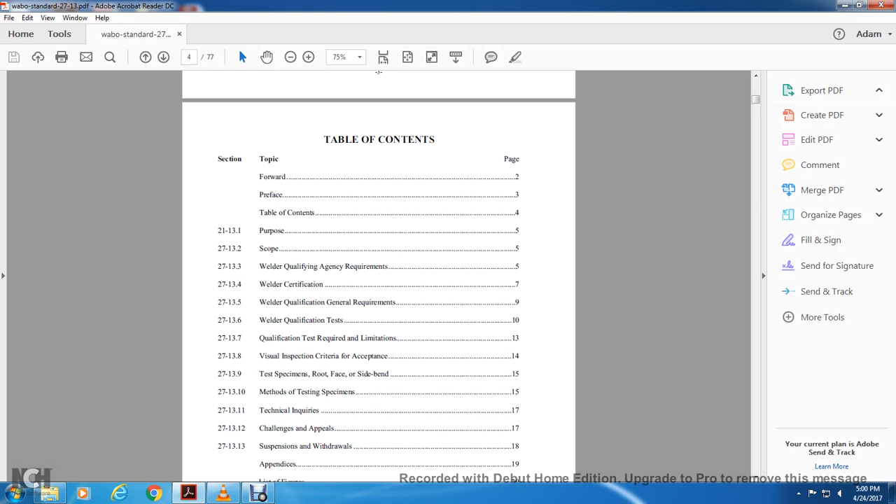Table of contents: forward, preface, table of contents, purpose, scope, qualifying agency requirements, welder certification, welder qualification requirements, welding qualification test required, limitation, visual inspection criteria for acceptance, test specimen (root, face, side bend), methods of testing specimens, technical inquiries, challenges, appeals, suspension, withdrawals, appendices, list of figures, table of terms and definitions, sample welding procedure specification.

The purpose of the standard is to provide greater confidence for the design professional and owner and building officials that welders, welding operators, and tackers are qualified to perform work which they have been certified for in building construction. Certification of personnel in accordance with the standard is intended to promote the overall welding quality assurance program.

Other components of the welding quality assurance may include but are not limited to the following: approved construction documentation, contractor quality control, approved welding procedure, welding qualification not covered by the standard, material testing, building department inspection, special inspection, structural observation. Qualifying tests described in the standard are not intended to be used as a guide for welding during actual construction.

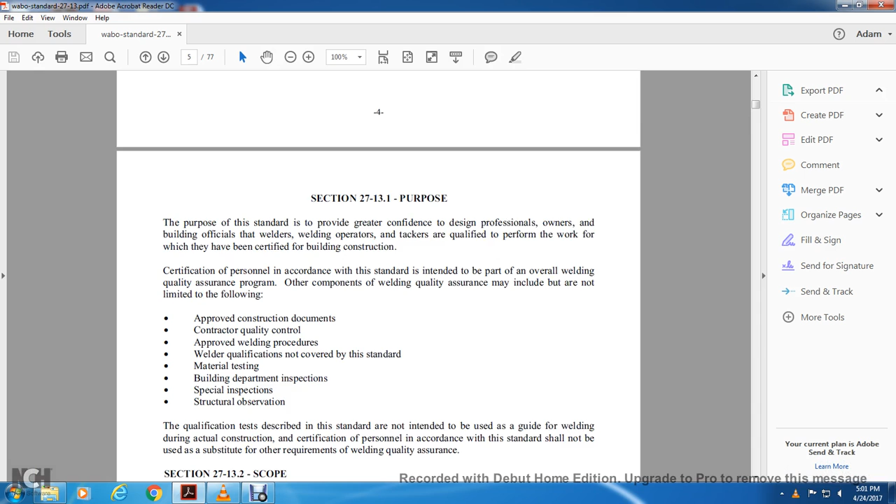This provision of the standard shall apply to the qualification and certification of welders, welding operators, and tackers performing structural steel, sheet steel, and reinforcing steel welding. These limitations of the welder operator qualifications are found in Table 2713-1.

Section 2713.3, Welder Qualifying Agency Requirements, General. The WABO-approved welder qualifying agencies are authorized to perform the welding operator performance qualification tests required by the standard as a WABO-approved facility. Welder qualification agencies interested in becoming certified by WABO to perform the test may obtain application forms and information concerning certification by contacting the WABO office or visiting the WABO website, wabo.org.

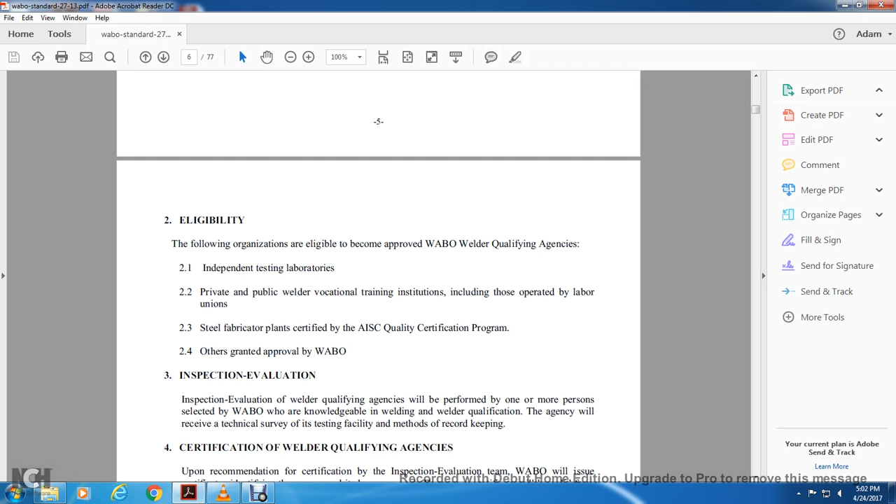Eligibility: the following organizations are eligible to become WABO welder qualifying agencies: independent testing laboratories, private and public welder vocational training institutions including those operated by labor unions, steel fabricator plants certified with the AISC quality certification programs, and other groups approved by WABO, Washington Association Building Officials.

Inspection evaluation of the welder qualification agency will be performed by one or more persons selected at WABO who are knowledgeable in welder qualifications. These agencies require a technical survey and testing facility review of the method and the required record keeping.

Certification of welder qualifying agency: upon recommendation of the certification inspection evaluation team, WABO is issued a certificate identifying the agency and key personnel. The agency certificate will be valid for a 3-year period, subject to periodic reinspection of the agency.

Agency personnel witnessing the test and proving the mechanical and visual testing of coupons must be WABO certified welding examiners.

The agency personnel can meet the WABO certified welding examiner requirement by submitting proof that they are an AWS (American Welding Society) certified welding inspector, qualified and certified in accordance with the provision of the American Welding Society QC1 standard for qualification and certification of welding inspectors, or by successfully completing the WABO written welder exam and a test based on the competence of the standard. Personnel performing radiographic testing will be qualified in accordance with the current edition of the American Society for Nondestructive Testing recommended practice number

SNT-TC-1A. Only individuals qualified as NDT nondestructive testing level 2 may perform and interpret radiographic testing.

Welders and welder operators must be certified by WABO in one or more of the following categories upon satisfactory completion of applicable qualification testing described in the standard. Structural welder processes include shielded metal arc welding (SMAW) manual, gas tungsten arc welding (GTAW) manual, gas metal arc welding (GMAW) semi-automatic, and flux core arc welding (FCAW) semi-automatic.

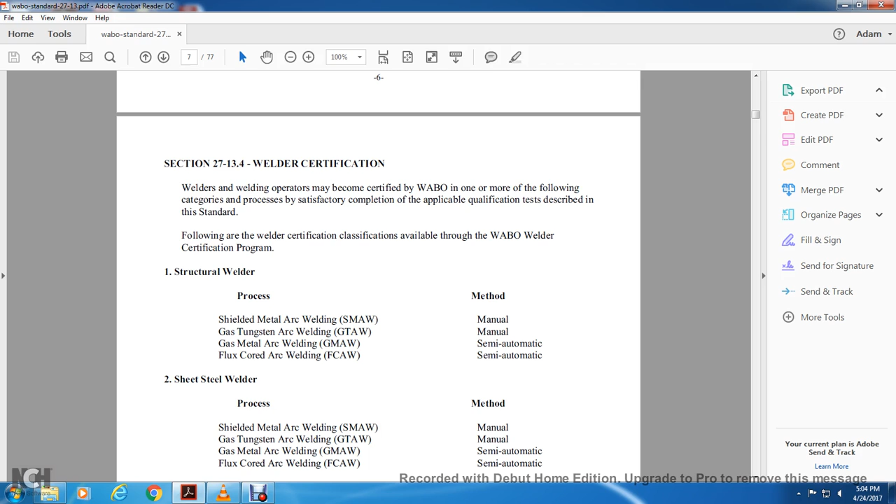Sheet steel welder process includes shielded metal arc welding (SMAW) manual, gas tungsten arc welding manual, gas metal arc welding (GMAW) semi-automatic, and flux core arc welding semi-automatic.

Welder operator process includes submerged arc welding (SAW) automatic. Reinforcing steel welder process includes shielded metal arc welding (SMAW) manual, gas metal arc welding semi-automatic, and flux core arc welding semi-automatic.

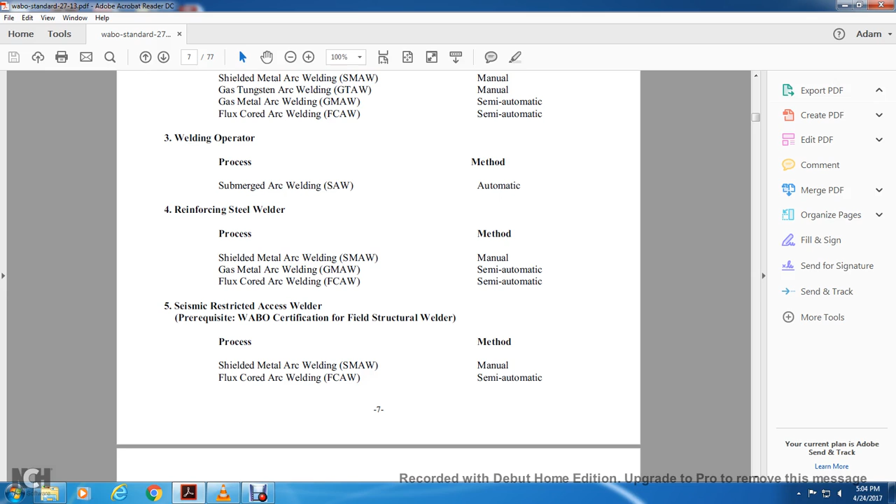Seismic restricted access welder prerequisites require WABO certification for field structural welder process: shielded metal arc welding (SMAW) manual method, and flux core arc welding (FCAW) semi-automatic.

Welder certificates are issued for a period of one year. For the certification to remain valid, the welder must have the certificate endorsed by his or her supervisor, designee, or a WABO certified welding examiner. The endorser shall witness the individual welding during the calendar quarter of being endorsed.

To renew the certificate, the welder must return the certification card properly endorsed with a signature from WABO and pay the renewal fee. The qualification of the welder or welder operator shall remain in effect indefinitely unless the welder is not engaged in the welding process for which he or she is qualified for the preceding 6 months, in which case new certification testing shall be required.

Per 6.3.2, if there is some specific reason for questioning the welder operator's ability, new qualification testing may be required. In the event the welder operator fails to pass the new qualification test, certification shall be suspended until he or she can successfully complete the welding test.

Per 6.3.3, if the welder fails to renew his or her certification on or before the expiration date, as an exception, the expired certification may be reinstated within 60 days after the expiration date. Thereafter, new qualification testing shall be required.

Certification for seismic restricted access welders should remain valid for 36 months, provided the continuity requirements of the process outlined above are met. After 36 months, a new qualification test is required.

Section 6.4, Welder certification revocation. Each certification card carries a statement that the card is the property of WABO, which entitles all possessional rights to WABO, thereby extending the authority beyond the officers, executive board and program managers to a representative acting on behalf of the WABO.

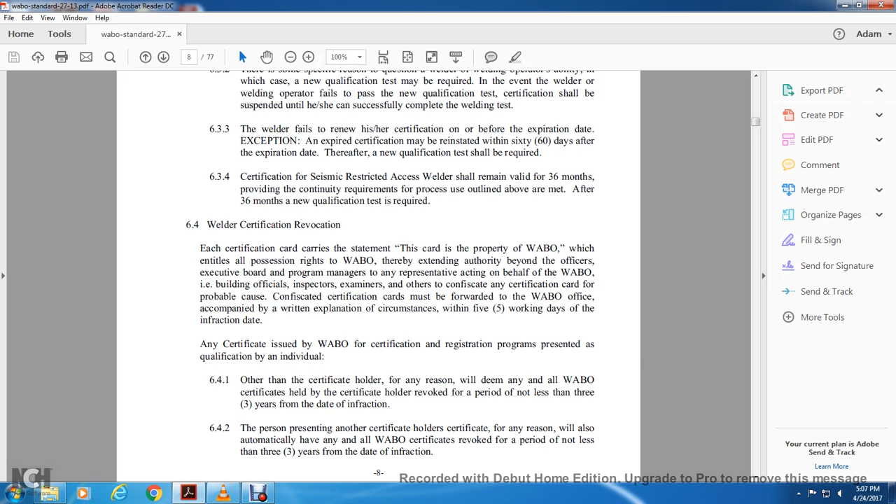Any certification issued by the Washington Association of Building Officials for the certification registration program presented with the qualification of an individual other than the certificate holder, for any reason, will deem any and all WABO certificates held by the certificate holder revoked for a period of not less than 3 years from the date of infraction.

The person presenting another's certificate for any reason will also automatically have any and all WABO certifications revoked for a period of not less than 3 years from the date of infraction.

If the person presenting another individual's certificate is not currently certified with WABO, that person will be prohibited from obtaining WABO certification for a period of not less than 3 years from the date of infraction. Altered certificates, other than approved versions currently on file with WABO, carry the same 3-year revocation provisions.

Section 2713.5, Welder qualification general requirements: knowledge and ability to work performance. Each of the welder operators should perform one or more test welds on prepared test coupons in accordance with the following.

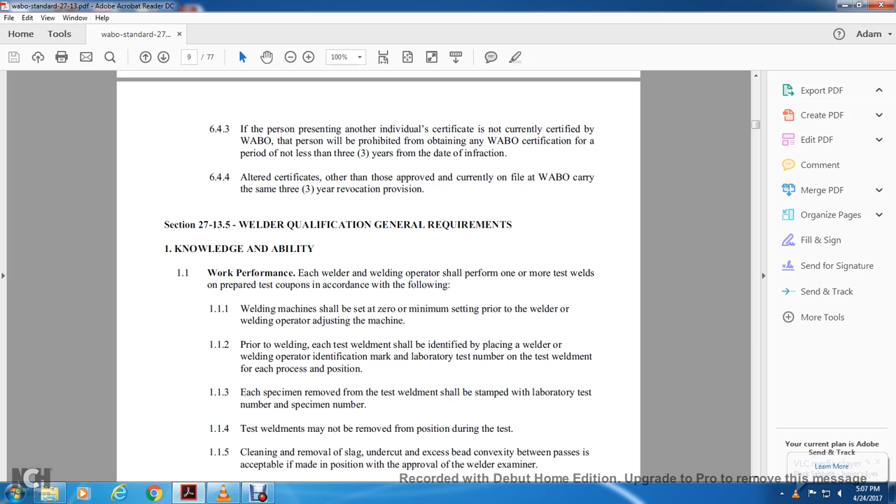The welding machine shall be set at zero minimum setting prior to the welder operator adjusting the machine. Prior to welding, each test weldment shall be identified by placing the welder operator identification marker and laboratory test number on the test weldment for each process position.

Each specimen removed from the test weldment should be stamped with the laboratory test number and the specimen number. Test weldments may not be removed from position during the test.

Cleaning and removing slag, undercut and excess bead convexity between passes is acceptable if made in position with approval of the welder examiner. Grinding off the root and cover pass is not permitted.

Records. A complete record should be made with the tests performed with each welder and welder operator, with the results of those tests. Original copies should be forwarded by the welder examiner to the Wabo office within 30 days together with the application filing fee.

A copy of each record shall be kept by the welder examiner, at the qualifying agency, for a period of 3 years. Bend test specimens and radiographic specimens shall be retained by the welder examiner, the qualifying agency, for a period of 6 months.

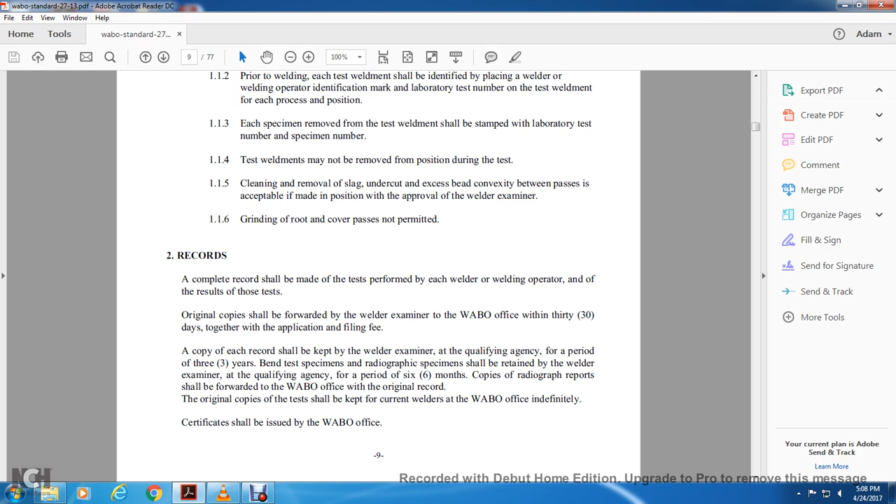Copies of radiograph reports shall be forwarded to the Wabo office. The original record and original copies of the test shall be kept with the current welders at the Wabo office indefinitely. Certificates shall be issued by the Wabo office.

A roster of current certified welding operators should be kept at the Wabo office. Records and specimens are available to those authorized by the Wabo to examine them. Bend specimens shall be maintained securely fastened together with identification stamping clearly visible.

Section 27-13.6, Welder Qualification Test. Qualification test for the structural welder. Welder qualification test for manual or semi-automatic welding shall be one of the following: groove weld test by plate, unlimited thickness; groove weld test by butt joints on pipe and square and rectangular tubing, unlimited thickness; groove weld test for T, K, and Y connections for pipe and tubing, unlimited thickness.

2. Qualification for testing sheet steel welder, see figure 27-13.09.7. The welder qualification test for sheet steel welding shall be the fillet weld T-joint test, sheet to supporting member.

3. Qualification testing for the welding operator, see figure 27-13.09.8. The welding operator qualification test shall be a groove weld test on plate.

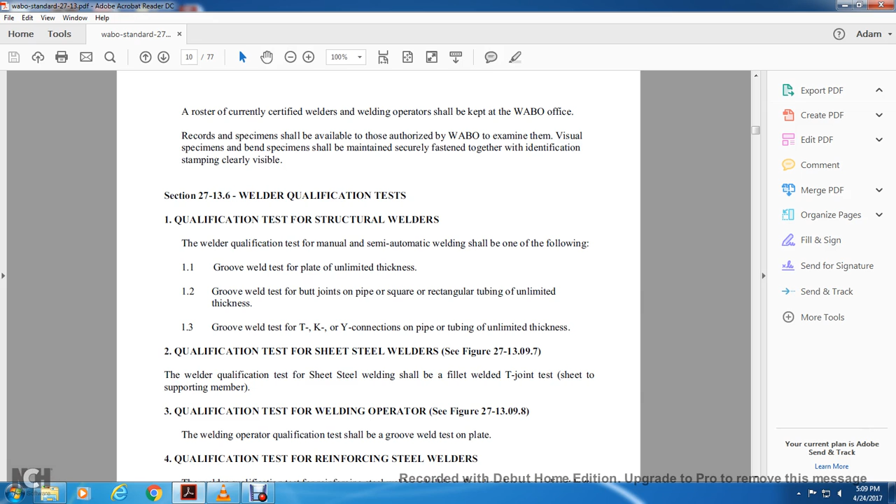4. The qualification testing for reinforcement steel welders. The welder qualification test for reinforcing steel welders shall be a flare bevel groove, indirect butt joint.

This is used to qualify welders for non-steel backing, used to open the root where groove welds are used. Test plate configuration dimensions shall be shown in figure 2713.14.1, figure 2713.14.2, and figure 2713.14.3 as applicable.

5.3 Test plate fabrication general requirements. Test plate assembly: the parts of the test plate assembly may be cut and tack welded together by any individual other than the welder performing the qualification test, except that the welder being qualified should attach the required welding tabs.

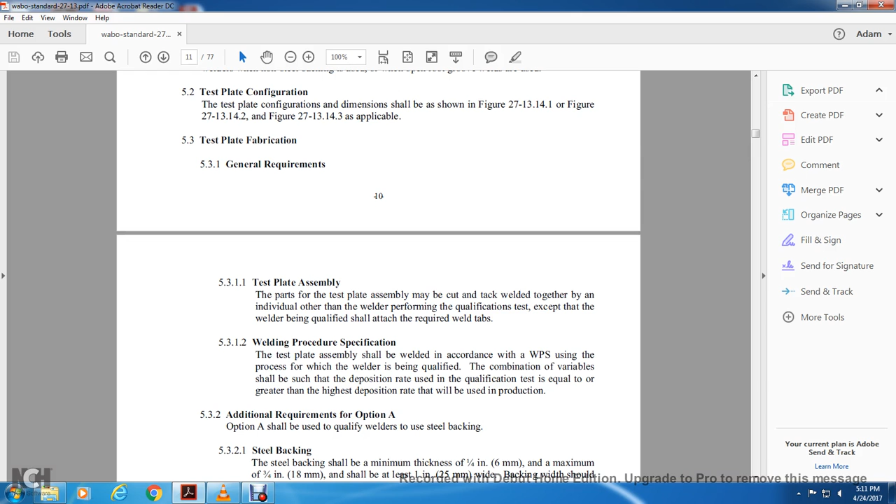Welding procedure specification. The test plate assembly shall be welded in accordance with the WPS using the process the welder is being qualified for. Combination variables shall be such that the deposition rate for the qualification test is equal to or greater than the highest deposition rate that will be used in production.

5.3.2 Additional requirements for Option A. Option A shall be used for qualifying welders who use steel backing. Steel backing shall have a minimum thickness of 1/4 inch (6 millimeters) and a maximum of 3/4 inch (18 millimeters), and shall be at least 1 inch wide.

Backing width should be 3 inches wide, but radiography should be used to evaluate the weld. Backing should be attached to the test plate assembly with tack welds.

Groove weld detail: the groove weld detail shown shall be 3/8 of an inch (10 millimeters) root opening, plus or minus 1/16 of an inch (1.5 millimeters). The included angle shall be 30 degrees, plus or minus 5 degrees.

Option A limitation: a welder qualified in accordance with Option A shall be permitted to weld any joint using steel backing. Separate qualification shall be required if the type of backing is changed, e.g. changing from ceramic to steel backing, or to open root joints, etc.

5.3.4 Additional requirements for Option B. Option B shall be used for qualifying welders for the use of backing other than steel, including ceramic, copper backing, or open root welding.

5.3.5 Backing removal. After the groove weld has been completed, non-steel backing, if used, shall be removed by the welder being qualified.

Back gouging and back welding removal shall be done in the overhead position. The root of the weld shall be back gouged to solid metal. The back gouged cavity shall be back welded.

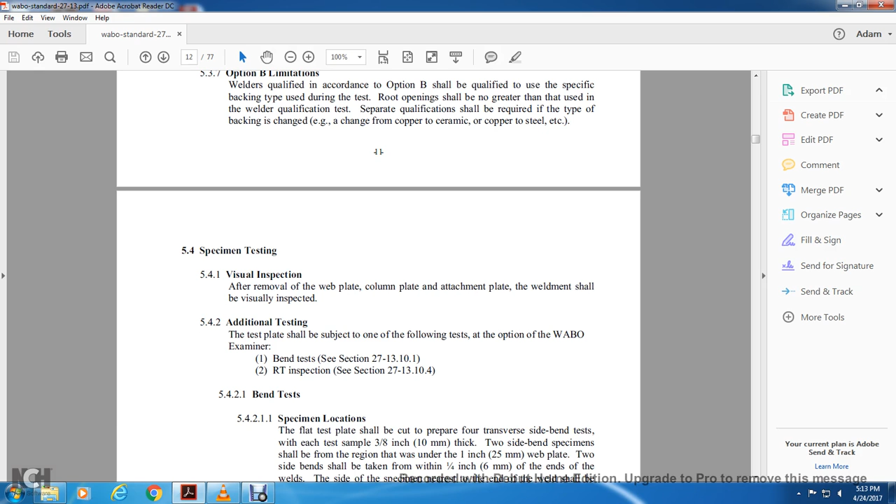Alright, 5-4, specimen testing. Visual inspection: after removal of the web plate, column plate, attachment plate of the weldment shall be visually inspected. Additional testing: test plate should be subject to one of the following tests, optional with the WABO examiner. Bending test, see Section 2713.10.1, or RT inspection, Section 2713.10.4.

Bending test. Specimen location. The flat test shall be cut and prepared with the 4 transverse side bend testing, with each test sample 3/8 inch thickness, 2 side bend specimens, which shall be from the region under the 1 inch web plate. 2 side bend plates shall be taken from within 1/4 inch of the end of the weld. The side of the specimen near the end of the weld shall be clearly marked.

5-4-2-1-2 specimen testing procedure. For 2 specimens taken at the end of the weld, specimen shall be bent so that the side of the bending specimen that was nearest the end of the weld becomes the convex side of the bending specimen, sees the greatest tension.

Retest. In case the welder or welding operator fails to meet the requirements for one or more test welds, a retest may be allowed under the following conditions. Immediate retest within 7 days of the notification of failure. Retest should consist of 2 welds of each type and each position which the welder or welding operator failed. Subsequent retest may be provided when the welder operator submits documented proof of 8 hours minimum further training practice, in which case a single retest weld of each type and position failed shall be made.

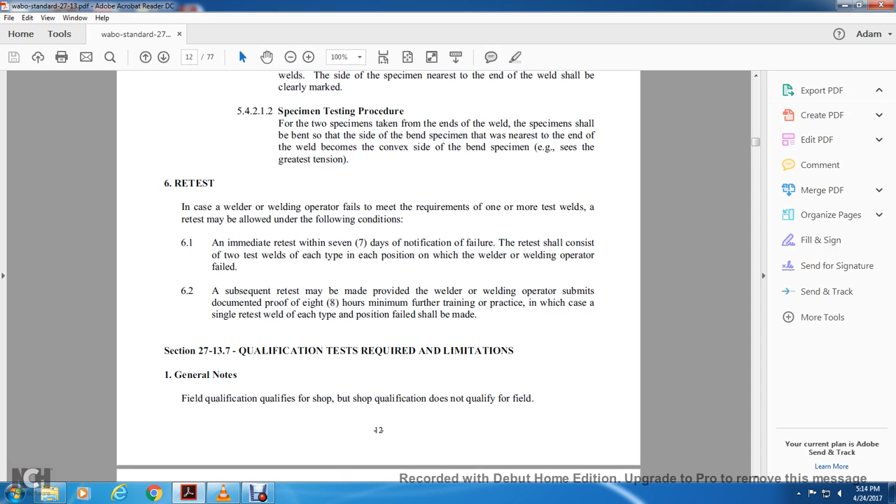Section 2317, 2713.7, qualification testing required limitations, general notes. Field qualification qualifies for shop; shop qualification does not qualify for the field. Qualified thickness, range, position are shown in Table 2713A through H. Limitation of these certifications are shown in Table 2713-1. Welder qualification operators with an approved electrode shielding medium combination shall be considered qualified to weld with any other approved electrode shielding medium combination of the process used in the procedure qualification testing.

For structural reinforced steel qualification, vertical position welding shall be upwards for each of the welding processes SMAW, GMAW, flux core arc welding, gas tungsten arc welding, and submerged arc welding. For the certifications, the required test plates for the pipe shall be welded in the structural steels listed in Table 2713J using electrode, position, plate or pipe thickness, Table 2713A through E.

For sheet steel welder qualification, T-weld plates will be welded using one of the sheet steels listed in Table 2713K using electrode position shown in Table 2713F and 2713G. Sheet steel qualification has qualified the welder for both galvanized and uncoated steel. For reinforcement steel welder qualification, number 4 ASTM A706 bars shall be welded in any of the following structures listed in Table 2713J. Electrodes in the position shown in Table 2713H for the 2 test assemblies are required.

The welder shall be certified in the welding process method of the qualifying test only: shielded metal arc welding, gas metal arc welding, gas tungsten arc welding, flux core arc welding, submerged arc welding. Certification for all others, including short circuiting, short arc gas metal arc welding, is not covered by the standard. The welder shall be qualified with filler metal of the same designation or lower strength than used in the test, of the F4 group for the submerged arc welding and shielded metal arc welding process. See Table 2713L.

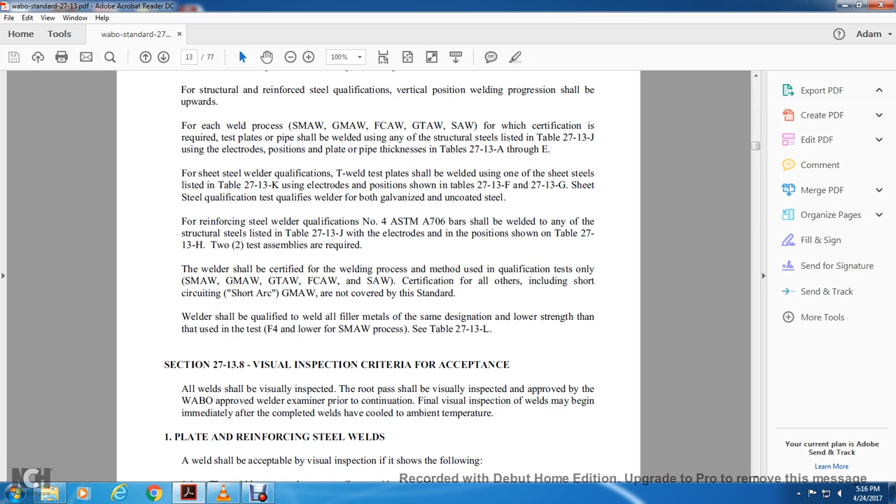Alright, Section 27-13.8, the visual inspection criteria and acceptance. All welds shall be visually inspected. The root pass shall be visually inspected and approved by the WABO approved welder examiner prior to continuation. Final visual inspection of welds may begin immediately after the completed welds have cooled to ambient temperature.

1. Plate and reinforcing steel welds. The weld shall be acceptable by visual inspection showing the following. The welds have no cracks or arc strikes outside of the welded area. Fusion exists between adjacent layers of weld metal and between the weld metal and the base metal. All craters are filled to the full cross-section of the weld. The weld profiles are in accordance with Section 27-13.8.4. Undercut is no more than 1/32 of an inch deep nor exceeds 10% of the test weld length. The piping porosity does not exceed 1 pore. Welds are terminated at the end of the joint in a manner that will ensure sound welds.

Piping and tubing. All pipe welds shall be accepted by visual inspection showing the following. The weld has no cracks or arc strikes outside of the welded area. All craters are filled to the full cross section of the weld. The face of the weld is at least flush with the outside surface of the pipe. The weld merges smoothly with the base metal; undercut shall not exceed 1/32 of an inch.

Weld reinforcement shall not exceed the following. Pipe wall thickness less than 3/8 of an inch, reinforcement 3/32 of an inch. Pipe wall thickness 3/8 of an inch to 3/4 of an inch, reinforcement maximum 1/8 of an inch; over 3/4 of an inch, 3/16 of an inch.

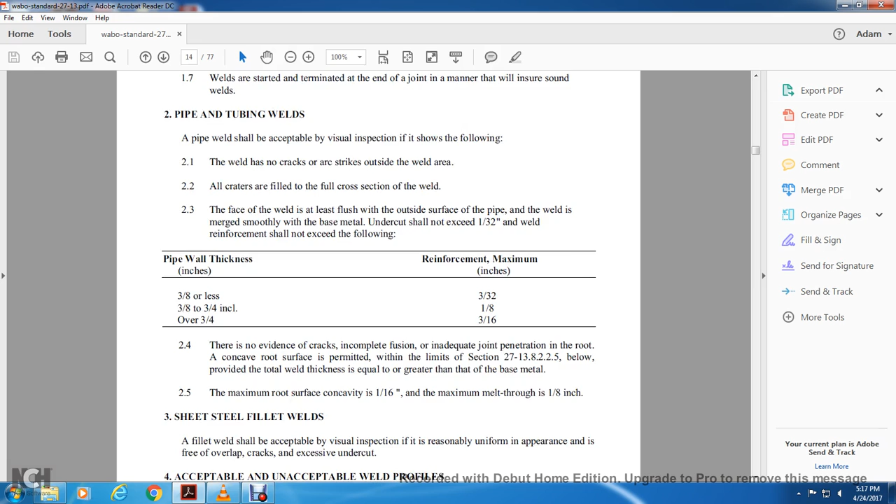There's no evidence of cracking, incomplete fusion, or inadequate joint penetration in the root. Concave root surface is permitted within the limits of section 27-13.8.2.2.5 below, provided the total weld thickness is equal to or greater than the base metal. The maximum root surface concavity is 1/16 of an inch. Maximum melt through is 1/8 of an inch.

Sheet steel fillet welds. Fillet welds may be accepted by visual inspection with reasonably uniform appearance, free of overlaps, cracks, and excessive undercut. For acceptable and unacceptable weld profiles, groove welds should preferably be made with slight or minimum reinforcement. The reinforcement shall not exceed 1/8 of an inch high and shall have a gradual transition to the plane of the base metal. The surface of figure 27-13-22 shall be free of the discontinuities shown in the butt joint in figure 27-13-10.2.

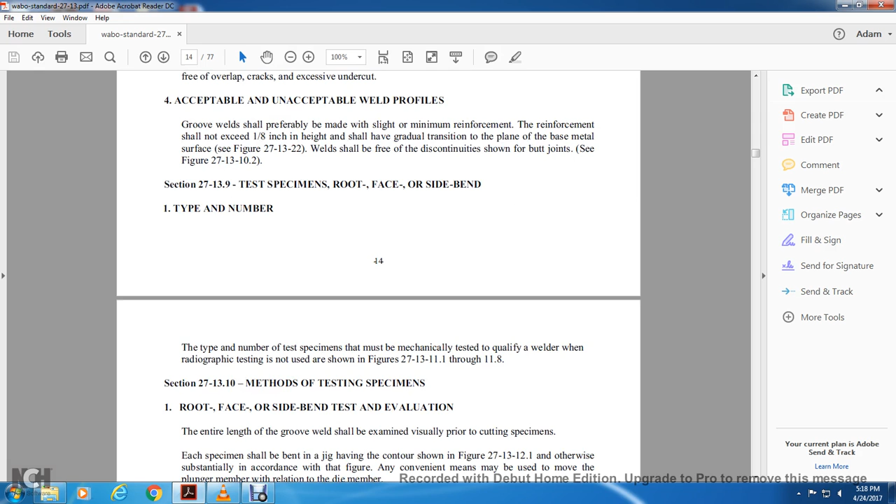Section 27-13.9, test specimens, root, face, and side bend. Type and number. The type and number of test specimens must be mechanically tested to qualify a welder when radiographic testing is not used, shown in figure 27-13-11.1 through 11.8. Section 27-13.10, method of testing specimens, root, face, and side bend testing evaluation. The entire length of the groove weld shall be examined visually prior to cutting the specimen.

Each specimen shall be bent in a jig having the contour shown in figure 27-13-12.1, or otherwise substantially in accordance with the figure, and any convenient means may be used to move the plunger member in relation to the die member. The specimen shall be placed on the die member of the jig with the weld at midspan. The root bend specimen shall be placed with the root of the weld directly toward the die member. The face bend specimen shall be placed with the face of the weld directly toward the die member. The side bend specimen shall be placed with the side showing the greatest discontinuity, if any, directed toward the die member. The plunger member shall force the specimen into the die member until the specimen becomes U-shaped.

The weld and heat affected zone shall be centered and completely within the bent portion of the specimen after testing. The convex surface of the bent specimen shall be visually examined for surface discontinuities. For acceptance, the surface shall contain no discontinuities exceeding the following dimensions: 1/8 of an inch measured in any direction on the surface; 3/8 of an inch for the sum of the greatest dimensions of discontinuities exceeding 1/32 inch but less than or equal to 1/8 of an inch; 1/4 of an inch maximum corner crack, except when the corner crack results from visible slag inclusion or other fusion discontinuity, then the 1/8 of an inch maximum shall apply to the specimen. Specimens with corner cracks exceeding 1/4 of an inch, with no evidence of slag inclusion or other fusion type discontinuity, shall be disregarded and a replacement test specimen from the original weldment shall be tested.

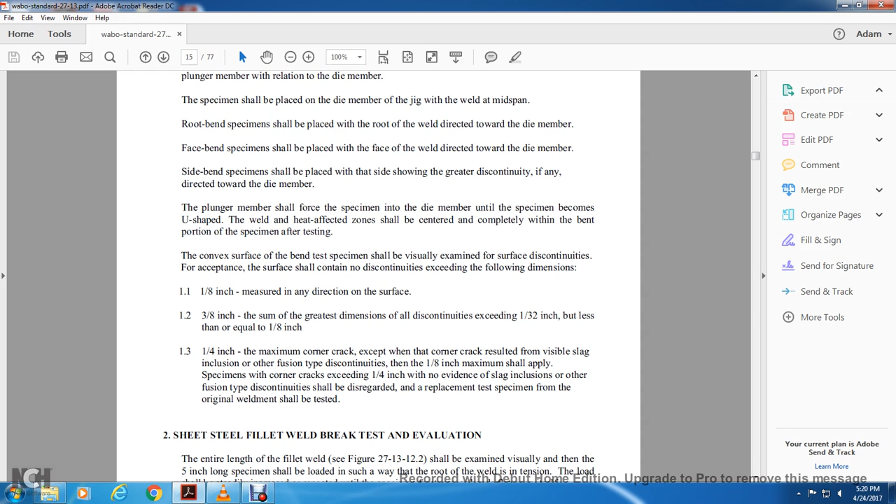Alright, 2. Sheet steel fillet weld break test evaluation. The entire length of the fillet weld, see figure 27-13-12.2, shall be examined visually. Then the 5 inch long specimen shall be loaded in such a way that the root of the weld is in tension. The load shall be steadily increased until the specimen fractures or bends flat upon itself. The specimen shall pass the test if it bends flat upon itself, or if the fillet weld fractures, the fracture shows incomplete fusion at the root of the joint.

3. Reinforcing steel weld test evaluation. The entire length of the flare bevel groove weld should be visually examined. Each test assembly shall be mechanically cut in 2 locations, providing 2 transverse cross sections of the welded assembly. Alright, the macroetch test shall be performed by polishing and etching the cross-section with a suitable solution to give a clear definition of the weld. Each etched cross-section shall have the minimum designated effective weld size. Flare groove test assembly. See figure 27-13.09.9.

Radiographic testing. Radiographic examination of the welder or operator test plate may be made in lieu of the bend test. Radiographic testing is used in lieu of the prescribed bend test. The weld reinforcement need not be ground or otherwise smoothed for inspection unless the surface irregularities or junction with the base metal would cause objectionable weld discontinuities to be obscured in the radiograph. Backing shall be removed for radiography. The root shall be ground flush with the base metal.

Exclude 1 1/4 inch at each end of the weld from evaluation in plate testing for welder qualification. Exclude 3 inches at each end of the length of the test plate for welding operator qualification. The welded test pipe shall be examined for a minimum of 1/2 of the welded perimeter, selected to include a sample of all positions welded. For example, a test pipe or tube welded in the 5G, 6G, or 6GR position shall be radiographed from the top center line to the bottom center on either side.

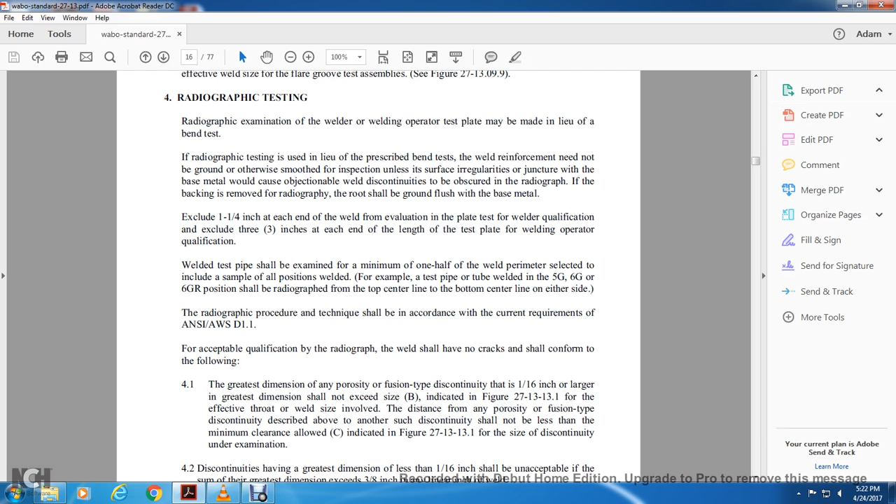The radiographic procedure and technique should be in accordance with the current requirements of ANSI/AWS D1.1. Acceptable qualification radiographs shall have no cracks and shall conform with the following. The greatest dimension of any porosity or fusion-type discontinuity that is 1/16 of an inch or larger shall not exceed size B, indicated in the figure

27-13-13.1, for the effective throat or weld size involved. The distance from any porosity or fusion-type discontinuity described to another such discontinuity shall not be less than the minimum clearance allowed in C, indicated in figure 27-13-13.1, for the size of the discontinuity under examination. Discontinuities having greatest dimensions of less than 1/16 inch shall be unacceptable if the sum of the greatest dimensions exceeds 3/8 of an inch in any linear inch of the weld.

Section 27-13.11, technical inquiries. All inquiries must be submitted in writing to the WABO Performance Standard Technical Advisory Task Force, WABO, P.O. Box 7310, Olympia, Washington 98507-7310. All inquiries must contain the name, address, and affiliation of the inquirer. They must provide enough information for the task force members to fully understand the point of concern in the inquiry. Where the point is not clearly defined, the inquiry will be returned for clarification. Inquiries shall be typewritten, and electronic mail is acceptable.

Each inquiry shall be limited to a single point unless the inquiry involves two or more interrelated concerns. Any inquiry should be concise yet complete to enable the task force members to quickly and fully understand the point of inquiry. Sketches should be used when appropriate, and all paragraphs, figures, and tables which relate to the inquiry must be provided. Technical inquiries to WABO concerning WABO Standard 27-13 shall be limited to questions of a general nature on matters directly related to the administration of the Washington Association of Building Officials Welder Certification Program.

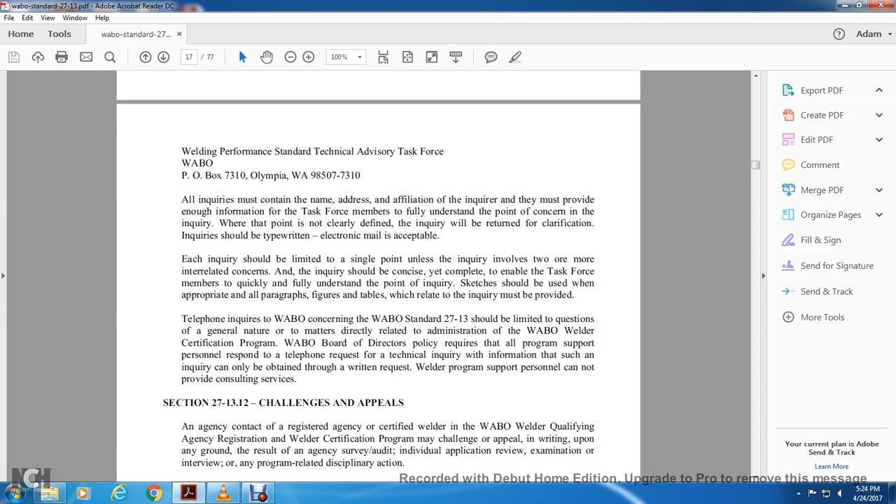WABO Board of Directors policy requires that all program support personnel respond to telephone inquiries with information such as how to obtain a written response. The welder program support personnel cannot provide consulting services. Alright.

2713.12, challenges and appeals. An agency contact, registered agency, or certified welder in the WABO welder qualifying agency registration and welder certification program may challenge or appeal in writing upon any ground resulting from an agency survey, audit, individual application review, examination, interview, or any other program-related disciplinary action. A challenge must be submitted in writing and reviewed by the WABO Executive Director or designee pursuant to the procedure adopted in implementing the policy.

If the challenge is rejected by the Executive Director or designee, the challenger may then appeal in writing to the WABO Certification Registration Committee. If the challenge is rejected by the Certification Registration Committee, the challenger may then appeal to the WABO Executive Board. If the WABO Executive Board denies the appeal, then the challenger's final right of appeal shall be to a hearing officer appointed by the WABO Executive Board pursuant to the procedure adopted in implementing the policy.

Section 2713.13, suspension and withdrawal. The registration of a specific agency or the certification of its personnel may be suspended or withdrawn pursuant to the procedure adopted in implementing the policy. Failure to abide by any of the terms of suspension may result in registration of the agency and/or certification being withdrawn. Registration and certification need not have been suspended before being withdrawn. The WABO Executive Director shall advise the agency contact person of his or her right to challenge and appeal the suspension or withdrawal action.

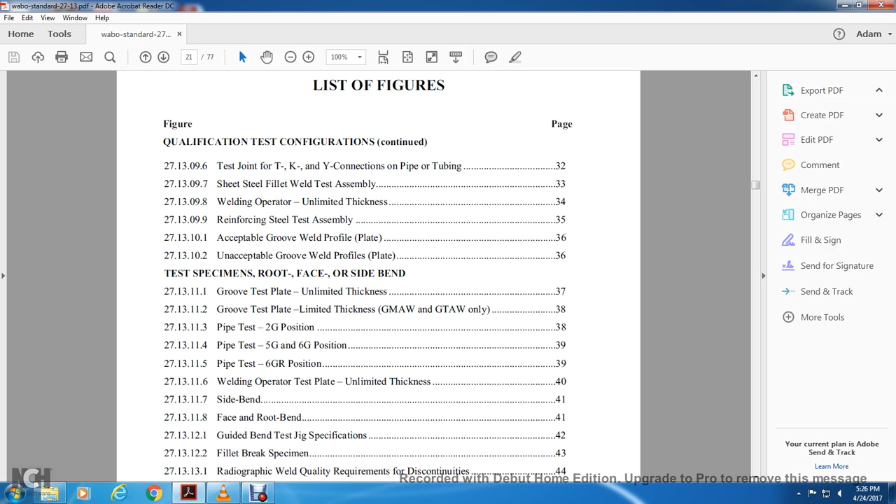Qualification test configuration: test joint, TKY joint piping or tubing, sheet steel fillet weld test assembly, welding operator unlimited thickness, reinforcement steel test assembly, acceptable groove weld profile plate, unacceptable groove weld profile plates. Testing specimen root, face, and side bend. Groove test plate, unlimited thickness. Groove test plate, limited thickness.

Gas metal arc welding, gas tungsten arc welding only. Pipe test 2G position. Pipe test 5G, 6G position. Pipe test 6GR position. Welding operator test, unlimited thickness. Side bend, face, root bend, guided bend test jig specifications. Fillet break specimen. Radiographic weld quality requirement discontinuity. Qualification test configuration, seismic test plate configuration option A, test plate configuration option B, test plate configuration illustrations.

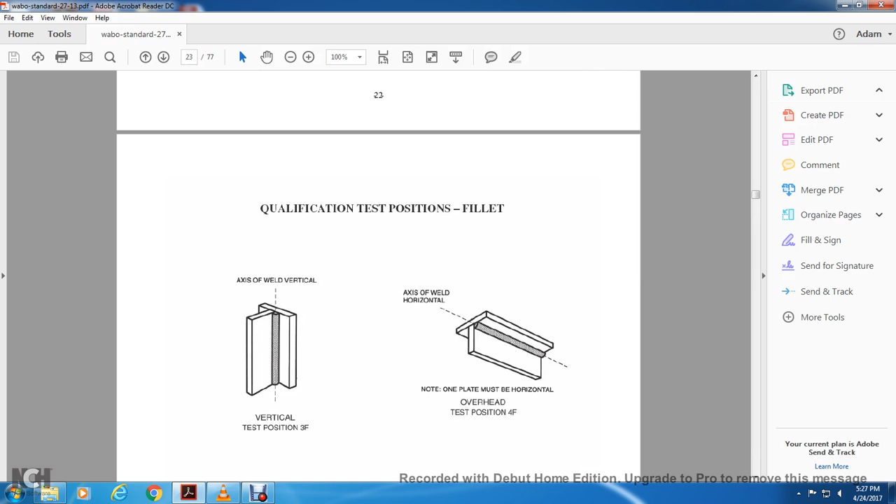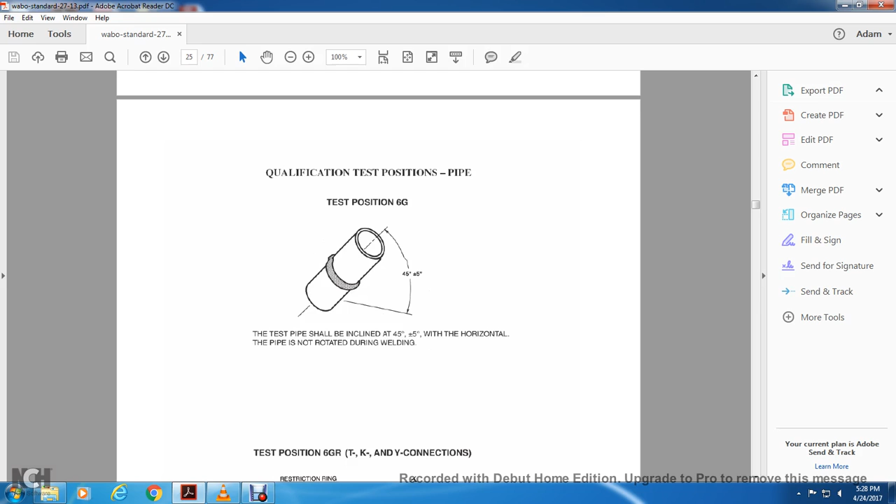All right, qualification testing position pipe, test pipe 6G. The test pipe shall be inclined at 45 degrees plus or minus 5 degrees with the horizontal. The pipe is not rotated during the welding. Testing position 6GR for TKY connections, restriction ring, test weld at 45 plus or minus 5 degrees. The test pipe shall be inclined at 45 degrees plus or minus 5 with the horizontal. The tube is not rotated during welding.

All right, parts of a tubular connection. You have the heel, side, and toe, the branch member and the main member, A, circular sections. Your square box shows the heel, corner, side, corner, toe, box section, branch member, angle. Alright, C, T connections, maximum limit of T connections 10 degrees, toe zone 10 degrees, 90, side zone, D, Y connection greater than 10 degrees.

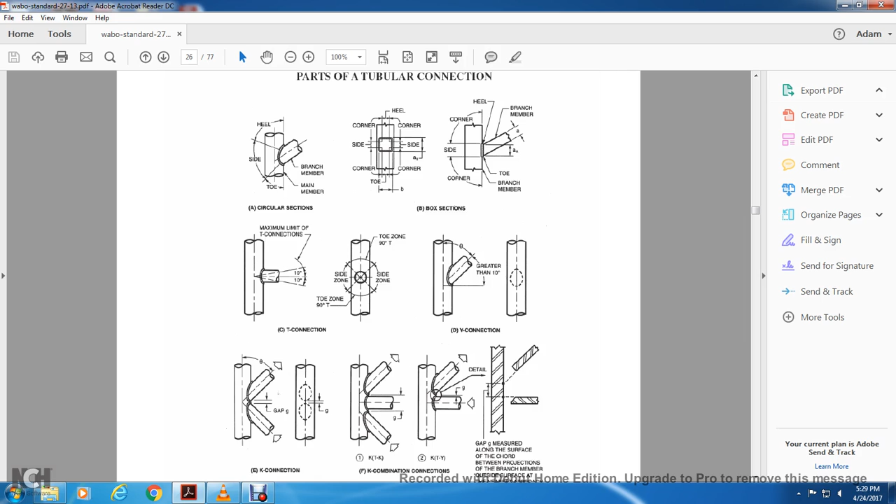E, K connection, gap G, angle. F, K combination connections, the KT-K. G, KT-Y, detail G, gap, and then they show the detailed measurement: gap G along the surface of the chord between the projections of the branch member outside surfaces at the nearest approach, and cross section.

Qualification testing of reinforcement steel: testing position vertical, axis of weld vertical; testing position overhead, axis of weld horizontal. All right, test plate for welder qualification, unlimited thickness, side bend specimen, 1 inch by 1 inch, 45 degree angle, 6 inch minimum, 1/4 inch, 5 inch, side bend specimen, direction of rolling.

When radiographed, no tack weld should be used in the test area. The joint details should be as follows: 1 inch plate with a single V groove, 45 degree included angle, 1/4 inch maximum root opening. Backing must be 1/4 inch through 3/8 inch by 1 inch. Minimum length of the welding groove shall be 5 inches. For radiographic qualification, backing must be at least 3/8 inch by 3 inch if the backing is not removed prior to the test.

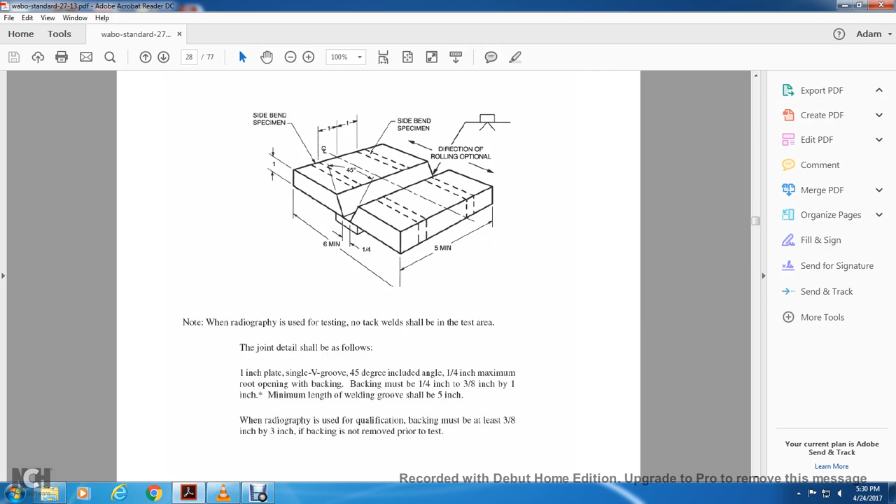All right, limited thickness, gas metal arc welding, gas tungsten arc welding only. You have your face bend, 3/8 inch, 1 inch, root bend specimen. The 45 degree angle, direction of rolling, shows the weld and the backing plate, 6 inch and 7 inch. When radiographed, no tack weld should be in the test area.

The joint details as follows: 3/8 inch plate, single V groove, 45 degree angle, 1/4 inch maximum root opening with backing. The backing must be 1/4 inch by 3/8 inch by 1 inch. Minimum length of the welding groove shall be 7 inches. For radiographic qualification, the backing must be at least 3/8 inch by 3 inches, 1/4 inch by 3 inch for gas tungsten arc welding, if backing is not removed prior to the test.

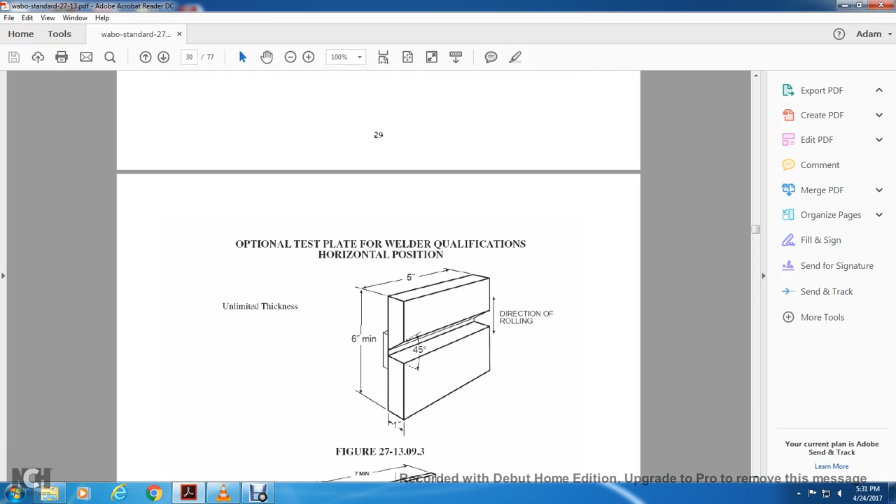All right, optional test plate for welder qualification, unlimited thickness, direction of rolling, 45 degree, 6 inch by 5 inch by 1 inch. Figure limited thickness, 7 inch by 6 inch by 1/4 inch by 3/8 inch, face bend, root bend specimen.

Direction of rolling, optional, and radiographic view of the testing. No tack weld should be in the testing area. Horizontal position qualification joint details may also be made with a single bevel groove, 45-degree angle, quarter-inch maximum root opening with backing.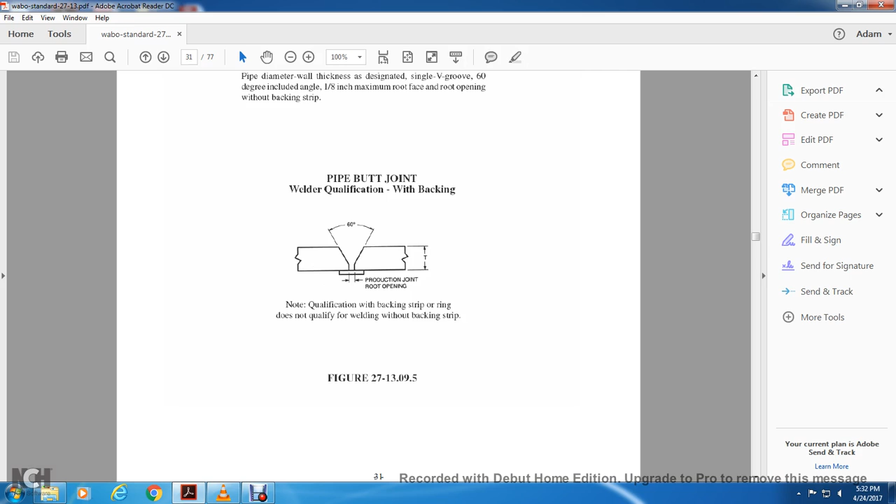Welding qualification without backing shows the 1/8 of an inch V groove with a 1/8 of an inch maximum, 1/8 of an inch minimum T size, and the 60-degree angle pipe. The joint details show the pipe diameter, wall thickness as designated, single V groove, 60-degree included angle, 1/8 of an inch maximum root face, root opening without backing strip. Pipe butt joint welder qualification with backing, 60-degree production joint root opening. Qualification with the backing strip or ring does not qualify the welder without backing strip.

Testing for T, K, and Y connections on pipe and tube. Minimum test pipe diameter is 6 inches. No limit of box tube with the 12-inch, 1.5 inch minimum, 3/16 of an inch minimum, 12-inch, 1.5 maximum, 1/8, 6-inch restriction ring, fillet weld.

The joint detail is as follows: single bevel groove, 37.5 degree included angle of the bevel on the pipe to the tube, at least 1/2 inch thickness with the square edge of the pipe. The tube shall be at least 3/16 of an inch thicker than the bevel pipe. The thickness 1/16 of an inch maximum root face, 1/8 of an inch root opening. The restriction ring shall be placed on the thicker material within 1/2 inch of the joint and shall extend at least 6 inches beyond the surface of the pipe and tube.

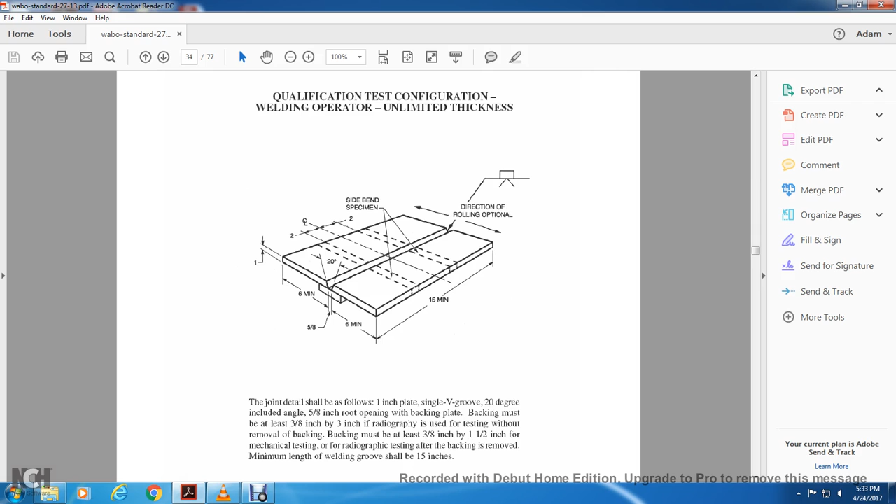Qualification testing configuration: sheet steel fillet weld test assembly with 16 gauge steel, 1/4 inch to 1/2 inch uncoated plate, 3 inches by 3 inches width, 6 inches. Qualification testing configuration, welding operator, unlimited thickness, side bend specimen, direction of rolling optional. 6-inch minimum, 6-inch minimum, 5/8 of an inch, 1 inch, 2 inch, 15 inches.

The joint design shall be as follows: 1 inch plate with a single V groove of 20-degree included angle, 5/8 root opening with back plate. Back plate must be at least 3/8 of an inch by 3 inch for radiographic testing without removing the back plate. Backing must be at least 3/8 of an inch by 1.5 inch for mechanical testing or radiographic testing after backing is removed. Minimum length of weld groove shall be at least 15 inches.

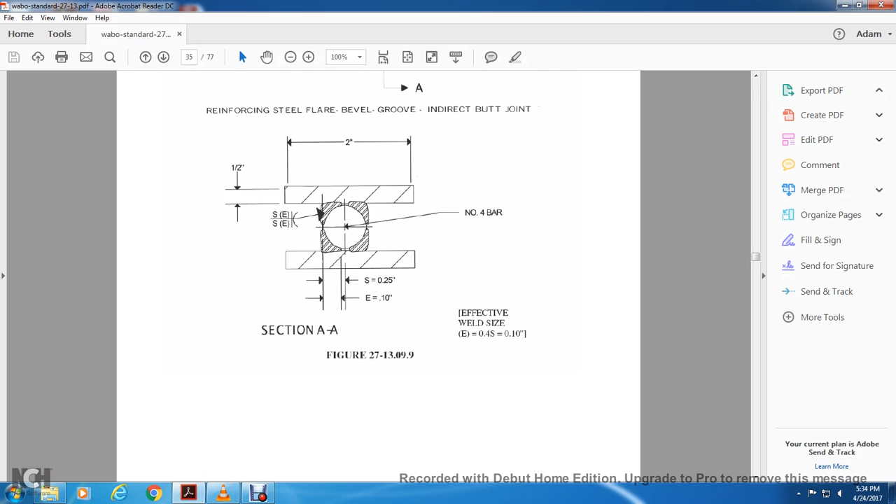Qualification testing configuration, reinforcement steel test assembly. Reinforcement steel flare bevel groove, indirect butt joint. S, E, L1 and L1, 3/4 inch maximum, 6 3/4 inch between, 3/4 max. L1 is equal to 3 inches. Section AA shows the 1/2 inch by 2 inches. The number 4 bar, S standard equals 1/4 inch. E equals 1/10 of an inch. Effective weld size is E, 0.4S, and 1/10 of an inch.

Acceptable groove weld profile plate: butt joint, equal thickness plate. The butt joint transition, unequal thickness plate. The reinforcement R shall not exceed 1/8 of an inch. Unacceptable groove weld profile plates: excessive convexity, insufficient throat, excessive undercut, overlap.

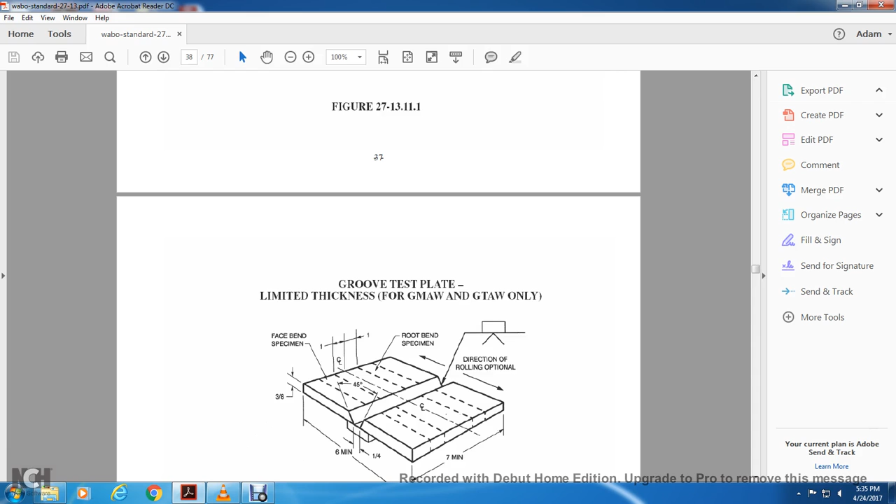Groove test plate, unlimited thickness. Side bend specimen 1 inch by 1 inch, 5 inches by 6 inches, 1/4 inch. Side bend, direction of rolling optional. Groove test plate, limited thickness, gas metal arc welding, gas tungsten arc welding, face bend, root bend specimen 1 inch by 3 inch, 6 inches by 1/4 inch, 7 inch. Direction of rolling optional. For radiographic testing, no tack weld should be in the test area.

Pipe testing 2G position side bend, 45 degree angle side bend. 5G and 6G position, top of the pipe, 5G, 6G, and 6GR position, side bend, 45 degrees, side bend. Pipe 6GR test position, top of the pipe, 45 degrees, side bend. The specimen bend shall be typically machined to a standard specimen with parallel sides.

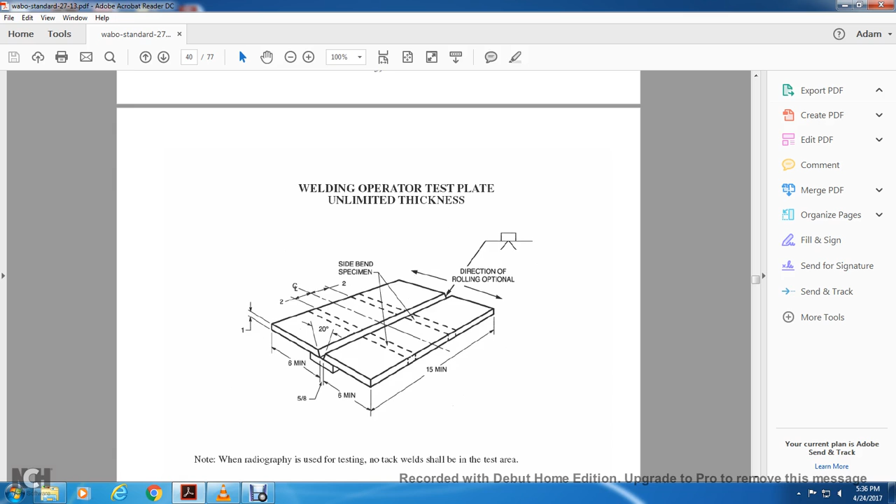Welding operator test, unlimited thickness, side specimen 15 inches by 6 inches by 5/8 of an inch, 1 inch, 2 inch. Center 2 inch from the center line, 20 degree angle groove. Direction of rolling optional. For radiographic testing, no tack weld should be in the testing area.

Side bend, face and root bend: 6 inches, with oxygen cut allow approximately 1/8 of an inch, mechanically remove the edges, 1/8 of an inch, 3/8 of an inch, approximately radius 1/8 of an inch, thickness of the plate T, face and root bend 6 inches minimum, 1 1/2 inch for the 3/8 of an inch. These edges may be oxygen cut and may not be machined.

2. The weld reinforcement and backing, if any, should be removed flush with the surface of the specimen. If a recessed backing is used, the surface may be machined to a depth not exceeding the depth of the recess to remove the backing; in such case, thickness of the finished specimen shall be as specified above. The cut surface shall be smooth and parallel.

3/4 inch, 4 1/2 inch, 5 1/4 inch shows the bending of the die member. Thickness member specimen: 3/8 of an inch A, 1 1/2 inch B, 3/4 inch C, 2 3/8 of an inch D, 1 3/16 of an inch. Material all steel, minimum specified yield strength 50,000 or under.

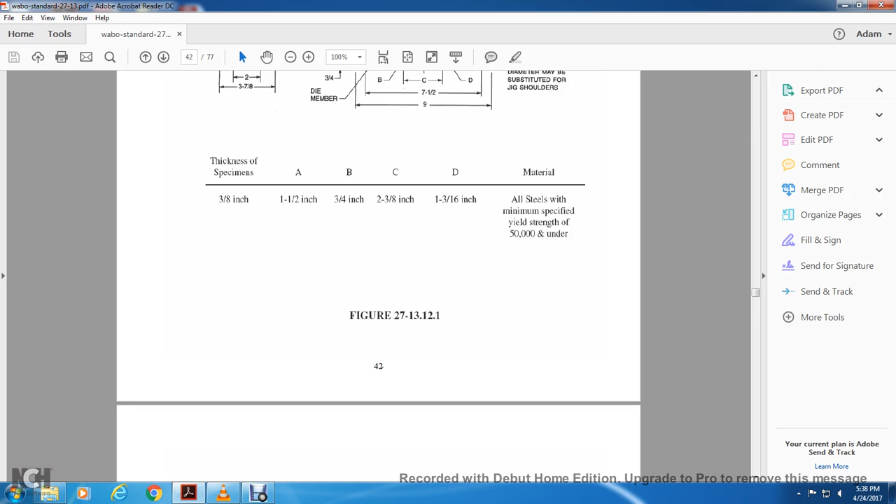Fillet break specimen lateral force, 1 1/2 inch discard. The fillet weld break specimen shall be cut from the test coupon as shown.

Radiographic welding quality requirements for discontinuity. C equals the minimum clearance measured along the longitudinal axis between the edge of the porosity or fusion type discontinuities; the larger adjacent discontinuities govern. A is the groove weld size or fillet weld size in inches.

Determine the maximum size of the discontinuity permitted for any joint weld size, projection horizontal to B; determine the minimum clearance allowed between the edge and the discontinuity on any side of the projection B, and C vertical. The B dimension of the discontinuity in inches starts at 1/2 inch: 1/4, 1/16, 1/8, 3/16, 1/4, 5/16, 3/8, 7/16, 1/2 of an inch.

Test plate configuration for option A: column plate, attachment plate, 1/4 inch, 6 inch maximum, 1/8 of an inch, 3 millimeter maximum, 3 inch thick, 7.5 inch maximum, 1 minimum weld plate thickness, 6 inch weld plate, column plate, 3/8 of an inch maximum radius, 3/4 inch max, 1 inch fillet, 6 inches by 6 inch minimum, 1 inch minimum plate.

The weld access hole dimensions applicable to this test only: groove dimensions shall be 3/8 inch with a root opening and 30-degree bevel. The steel backing shall be equal to or greater than 1/4 inch but not greater than 3/4 inch thick, and shall be a minimum of 1 inch wide.

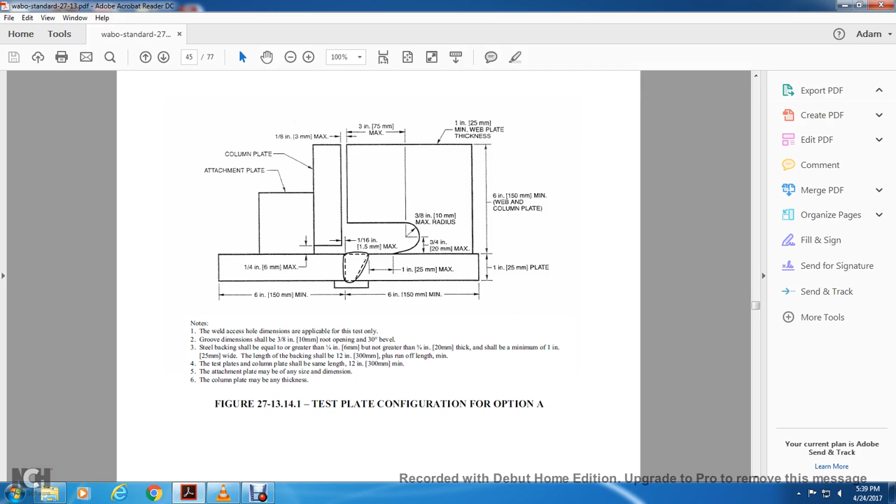Length of the backing shall be 12 inches plus the run off length minimum. The test plate column plate shall be the same length, 12 inches minimum. Attachment plate may be any size dimension. Column plate may be any thickness.

The non-steel backing shall have an open root. The groove shall be a 30-degree bevel with root opening; the test shall be maximum for the fillet weld qualified. Test plate and column plate should be the same length, 12 inches minimum, and attachment plate may be any other side dimension. Column plate may be any thickness.

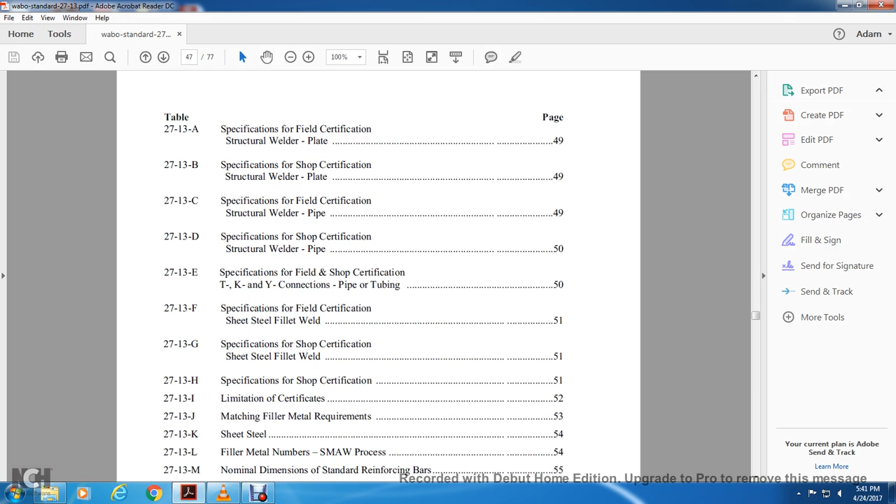Consists of tables: specification for field certification structural welder plate, specification for shop certification structural welder plate, specification field certification structural welder pipe, specification shop certification structural welder pipe, specification field/shop certification TK and Y connections piping and tubing, specification field certification sheet steel fillet weld, specification shop certification sheet steel fillet weld, specification limitation certifications matching filler metal requirements, sheet steel filler metal numbers, shielded metal arc welding process.

Nominal dimension standard reinforcement bars. Designation for welding allied process, alphabetical process designation welding allied process, alphabetical and designation, standard welding terms and definitions.

Sample welding procedures shielded metal arc welding. Sample welding procedures: flux core arc welding. Sample welding procedures: gas metal arc welding, specifications for welding certification structural welder plate, and submerged arc welding, gas metal arc welding, flux core arc welding, gas tungsten arc welding.

Use electrode with AWS designation. Quantity of the test plate to be welded in position. Thickness for each test plate. Thickness range. Position qualified.

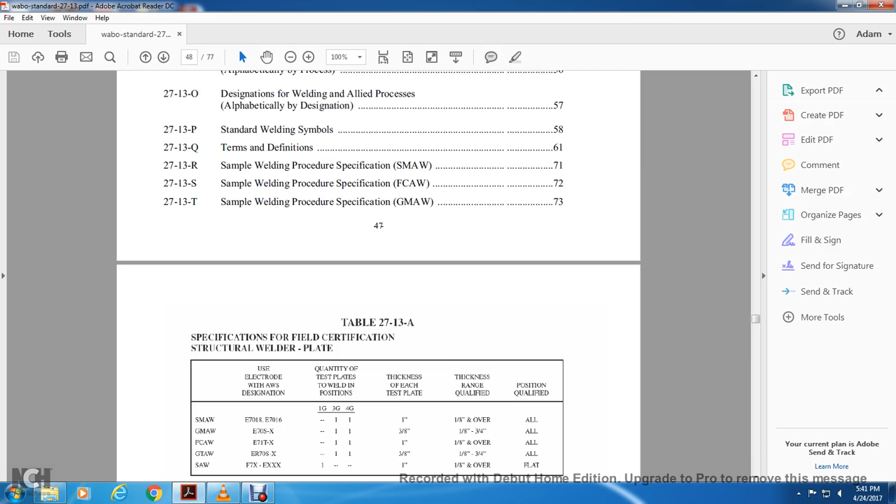Table 2713B: specification for shop certification, structural welder, plate. Submerged arc welding, gas metal arc welding, flux core arc welding, gas tungsten arc welding, using electrode with American Welding Society designation. Quantity of test plates to weld in position, thickness of each test plate, thickness range qualified, position qualified.

Table 2713C: specification for field certification, structural welder pipes. Submerged arc welding, gas metal arc welding, flux core arc welding, gas tungsten arc welding. Use of electrode with American Welding Society designation, quantity of test plate with welding position, test pipe size, pipe size qualified, material thickness qualified, pipe and plate position qualified.

Specification for shop certification, structural welder, pipe. Submerged arc welding, gas metal arc welding, flux core arc welding, gas tungsten arc welding. Electrode used by AWS designation, quantity of test plates to be welded in position, test pipe size, pipe size qualified, material thickness qualified, pipe and plate position qualified.

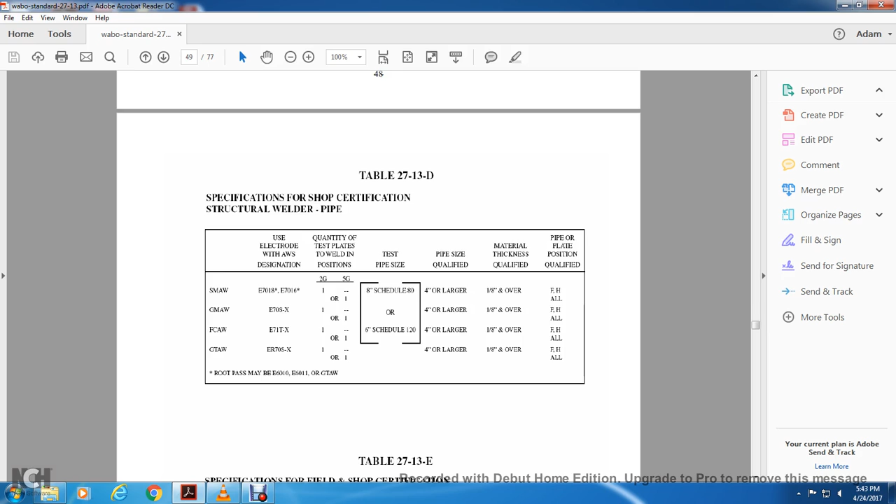Table 2713E: specification for field or shop certification, T-K-Y connection pipe and tubing. Submerged arc welding, gas metal arc welding, flux core arc welding, gas tungsten arc welding, using electrode with AWS designation. Quantity of test plates to weld in position, test pipe size, pipe size qualified, material thickness and qualified, pipe and plate position qualified.

Specification for field certification, sheet steel fillet weld. Submerged arc welding, shielded metal arc welding, gas metal arc welding, flux core arc welding, gas tungsten arc welding. Use electrode with American Welding Society designation. Quantity of testing plates to the welding position, thickness of each test plate, thickness range and qualified.

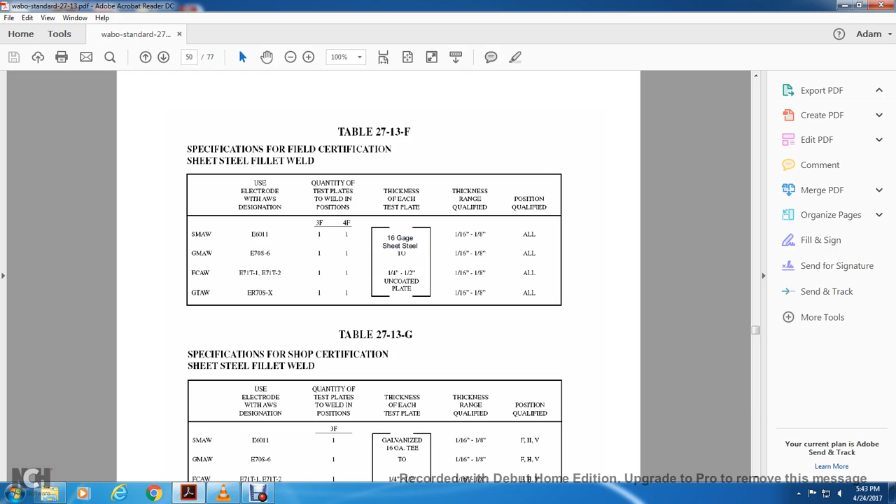Position qualified. Specification for shop certification, sheet steel fillet weld: submerged arc welding, gas metal arc welding, flux core arc welding, gas tungsten arc welding. Use electrode with AWS designation. Quantity of test plates to weld in position, thickness of each tested plate, thickness range qualified, position qualified.

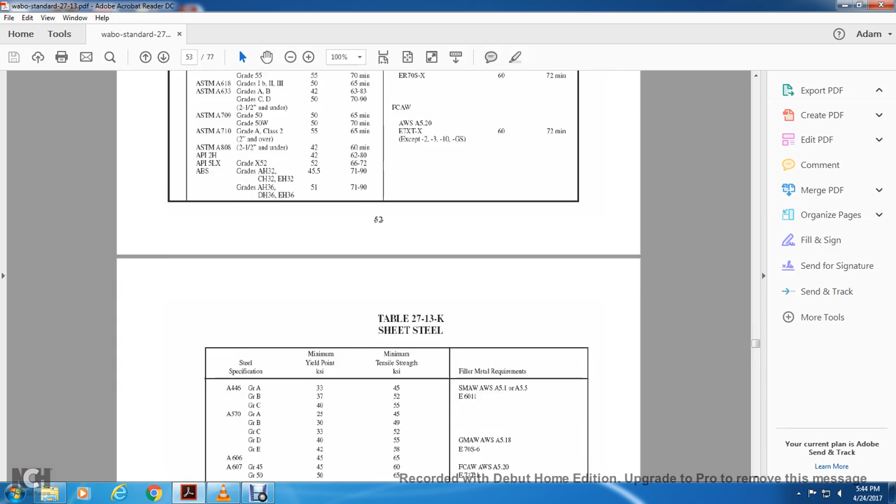Limitations of certifications, matching filler metal requirements. Sheet steel filler metal numbers and shielded metal arc welding process, nominal dimension standard for reinforcement bars, designation of welding and allied processes listed alphabetically, and designation of standard weld.

Let's start on this. We'll do the top first, and then we'll move down.

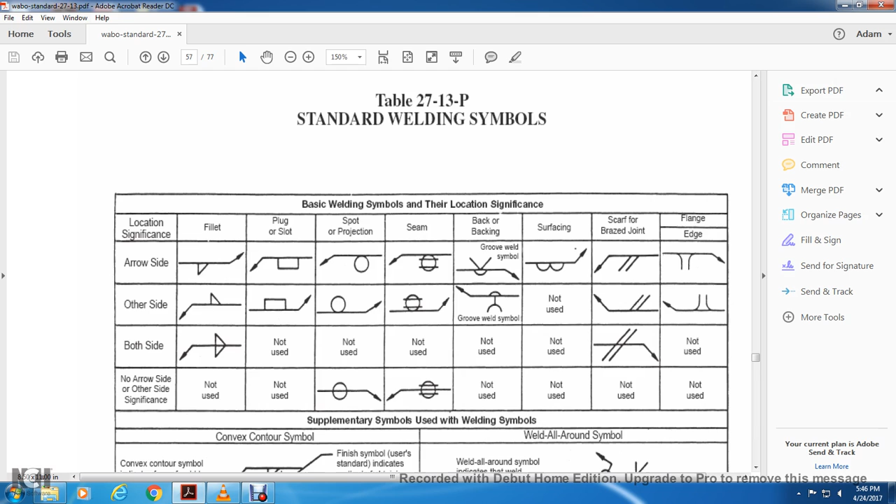The convex contour symbol indicates the face weld is to be finished with a convex contour. Finish symbol: the user's standard indicates the method of obtaining the specific contour or degree to which the weld is finished.

A circle around the symbol indicates the weld extends completely around the joint. This shows the circle around the arrow for the joint, and the fillet and double fillet weld. Joint with backing shows the plug or slot level with an M for material, with dimension and spacing noted.

Groove weld. Shows the modified groove weld with a plug or slot combined with two groove welds, note the double bevel groove with material, dimension, or spacing specified. Any applicable welding symbol: a groove symbol with a filled-in convex sign indicates melt-through, which is not dimensioned except height.

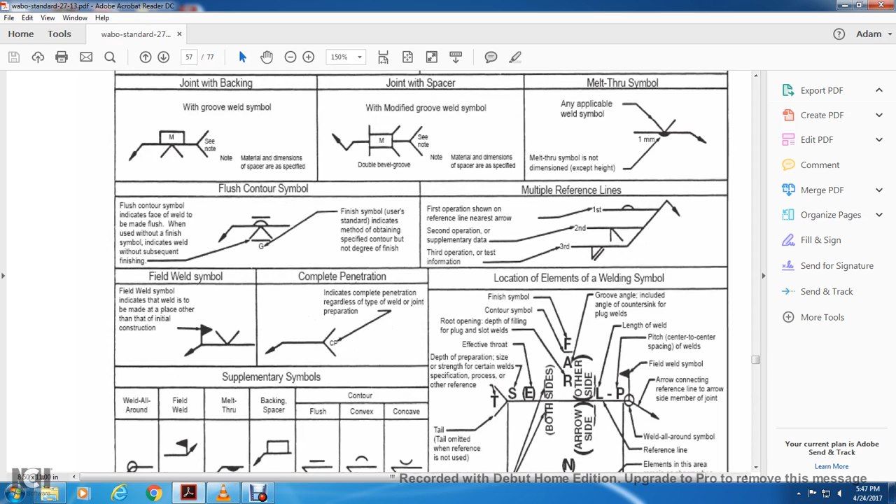Alright, your flush contour symbol shows the, let's start here down in supplementary symbols. The circle around the junction of the arrow and the line is weld all around. Field weld shows the flag, either left or to the right. Melt through for the bottom shows a filled in convex shape.

Backing, spacer shows a rectangle on top or through the middle without the line going through the center. Flush is the line running parallel before the turn of the arrow. Convex shows the line of a cave, upper U or like a thumbnail, and then under U with a concave.

Flush contour symbol indicates face of welds made flush. When used without a finish symbol, it indicates welding without subsequent finishing. The finish symbol used with the standard indicates the method of obtaining the specified contour, but not degree of finish. Multiple reference lines for operations shown with the reference nearest the arrow.

Second operation: supplementary data. Third operation: testing information. The field welding symbol indicates the weld is to be made at a place other than the initial construction. Complete penetration includes complete penetration regardless of the type of weld or joint preparation.

Location of the elements of welding symbols. Starting with the arrow: arrow connection, reference line, arrow side member of the joint, weld all around symbol, joint, fillet weld symbol, reference line, pitch or center spacing of the welds, groove angle, included angle, countersink of the plug welds.

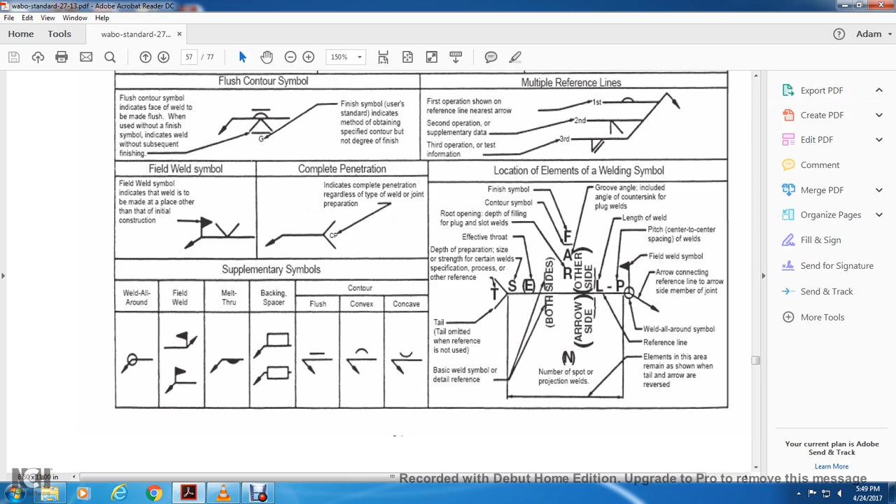Depth of preparation, size of certain welds and specification process. The tail is omitted when reference is not used. Basic weld symbol, the detailed reference, other side or both sides.

Standard welding symbols continued: combined welds, double fillet welding, size, length, specification process, other references. Length omission indicates the weld extending the length between the change of direction and dimension.

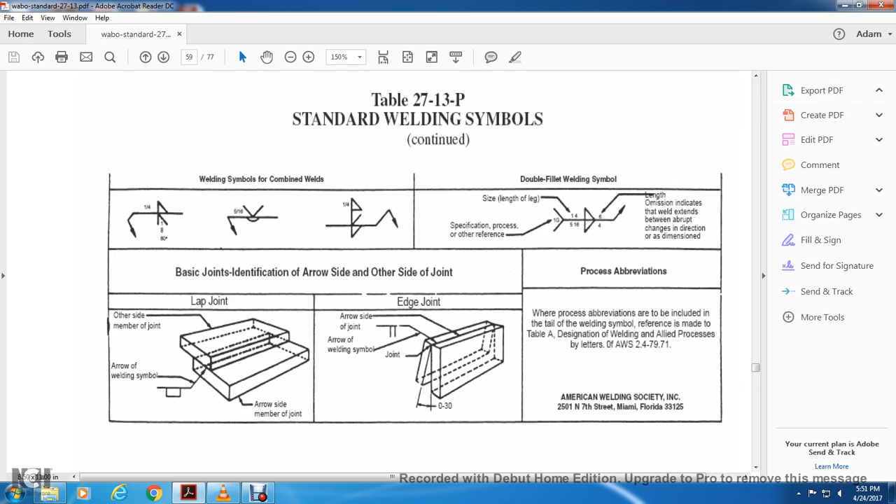Process abbreviations: when the process abbreviation is used, it shall be included in the tail of the welding symbol, referenced with the table A designation of welding and allied processes by letters of the American Welding Society. American Welding Society Incorporated, 2501 N 7th Street, Miami, Florida 33125.

Table of definitions: all weld metal test specimen is a test specimen with reduced section composed wholly of weld metal. Angle of bevel, see preferred term bevel angle. Arc gouging is a process using an arc to gouge and form the bevel or groove.

As-welded is the condition of weld metal, weld joints, or weldments after welding, prior to any subsequent thermal, mechanical, or chemical treatments. Automatic welding is equipment which performs the welding operation without adjustment of the controls by the welding operator. The equipment may or may not perform loading and unloading of the work.

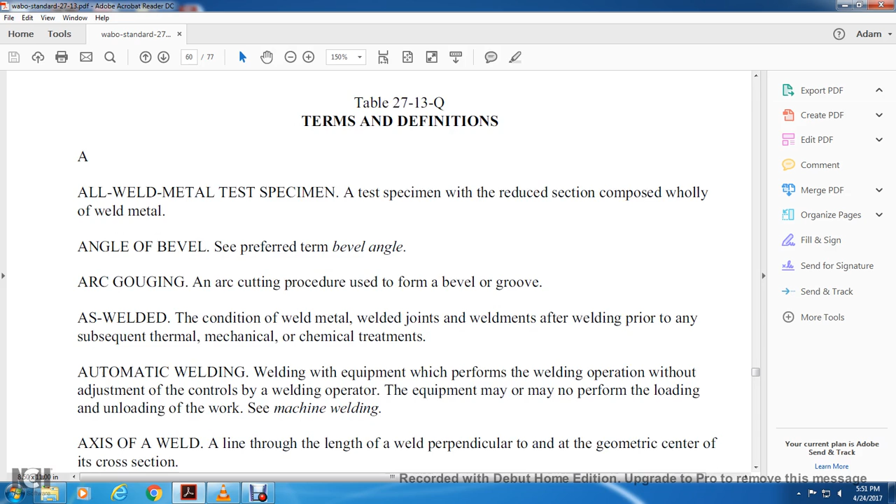This is machine welding. Axis of the weld is an imaginary line through the length of the weld, perpendicular to, and at the geometric center of, the cross section.

Back gouging: the removal of weld metal and base metal from the other side of a partially welded joint to ensure complete penetration upon subsequent welding from that side. Backing: material (metal, weld metal, carbon or granular) placed at the root of the weld joint for the purpose of supporting molten weld metal. Backing pass: a pass made to deposit a backing weld. Backing ring: backing in the form of a ring, generally used in the welding of pipe.

Back strap: see preferred term backing. Backing strip: backing in the form of a strip. Backing weld: backing in the form of a weld; in tubular structures, the initial closing pass in a complete joint penetration groove weld made from one side only, which serves as backing for subsequent welding and is not considered part of the theoretical weld. Back weld: a weld deposited at the back of a single groove weld.

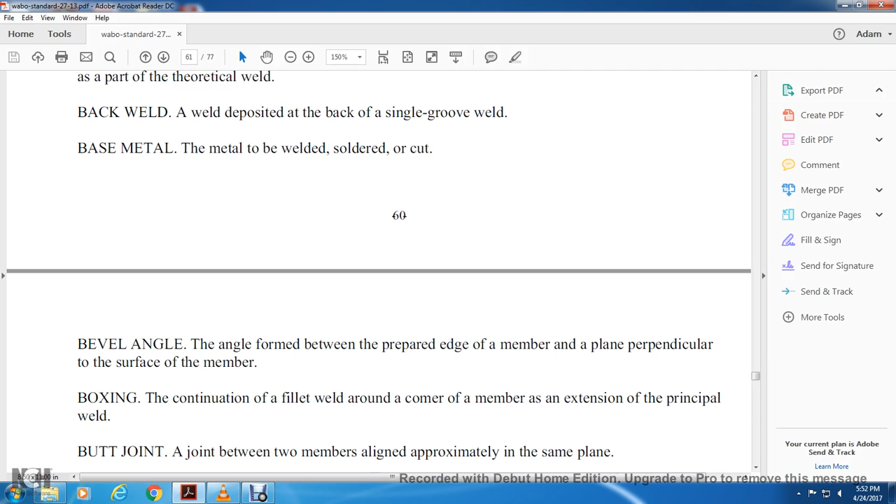Base metal: the metal to be welded, soldered or cut. Bevel angle: the angle formed between the prepared edge of a member and a plane perpendicular to the surface of the member. Boxing: the continuation of a fillet weld around a corner of a member as an extension of the principal weld. Butt joint: a joint between two members aligned approximately in the same plane. Butt weld: an erroneous term for a weld in a butt joint; see butt joint.

Complete fusion: fusion over the entire fusion faces and between all adjoining weld beads. Complete joint penetration: when the weld completely fills the groove and is fused to the base metal throughout its total thickness. Complete penetration: see preferred term complete joint penetration. Consumable guide electroslag welding: see electroslag welding.

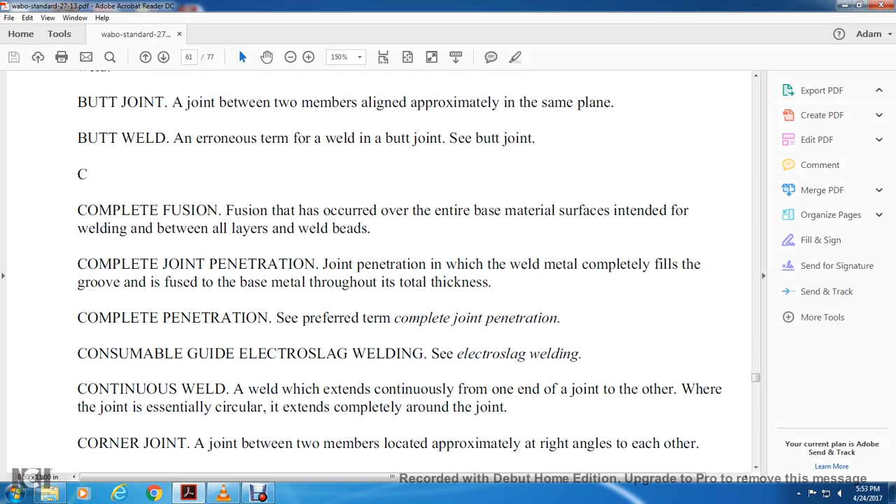Continuous weld: a weld which extends continuously from one end of the joint to the other; where the joint is essentially circular, it extends completely around the joint. Corner joint: a joint between two members located approximately at right angles to each other. CO2 welding: see preferred term gas metal arc welding. Crater: in arc welding, a depression at the termination of a weld bead or in the molten weld pool.

D. Defect: a discontinuity or discontinuities which by nature or accumulated effect render a part or product unable to meet minimum applicable acceptance standards or specifications. The term designates rejectability. Defective weld: a weld containing one or more defects. Depth of fusion: the distance that fusion extends into the base metal or previous pass from the surface melted during welding.

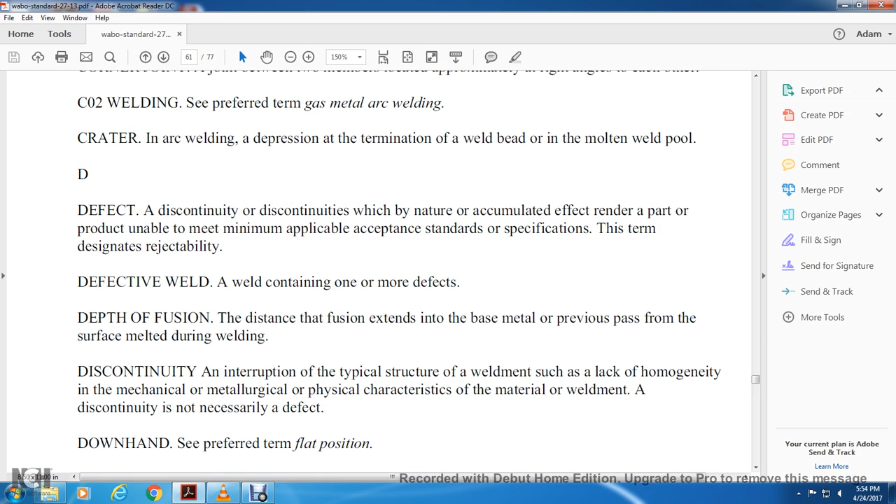Discontinuity: an interruption of the typical structure of a weldment, such as a lack of homogeneity in the mechanical, metallurgical or physical characteristics of the material or weldment. A discontinuity is not necessarily a defect. Downhand: see flat position. Effective length of weld: the length of weld throughout which the correctly proportioned cross section exists; in a curved weld, it is measured along the weld axis.

Electrogas welding (EGW): an arc welding process which produces coalescence of metals by heating with an arc between a continuous filler metal consumable electrode and the work. Molding shoes are used to confine the molten weld metal for vertical position welding. The electrodes may be either flux cored or solid. Shielding may or may not be obtained from an externally supplied gas or mixture.

Electroslag welding (ESW): a welding process producing coalescence of metals with molten slag which melts the filler metal and the surfaces of the work to be welded. The molten weld pool is shielded by the slag, which moves along the full cross section of the joint as welding progresses. The process is initiated by an arc which heats the slag. The arc is then extinguished and the conductive slag is maintained in a molten condition by its resistance to electric current passing between the electrode and the work.

Consumable guide electroslag welding: a method of electroslag welding in which filler metal is supplied by an electrode and its guiding member. Faying surface: the mating surface of a member which is in contact or in close proximity with another member to which it is to be joined. Filler metal: the metal to be added in making a welded joint. See electrode and welding rod.

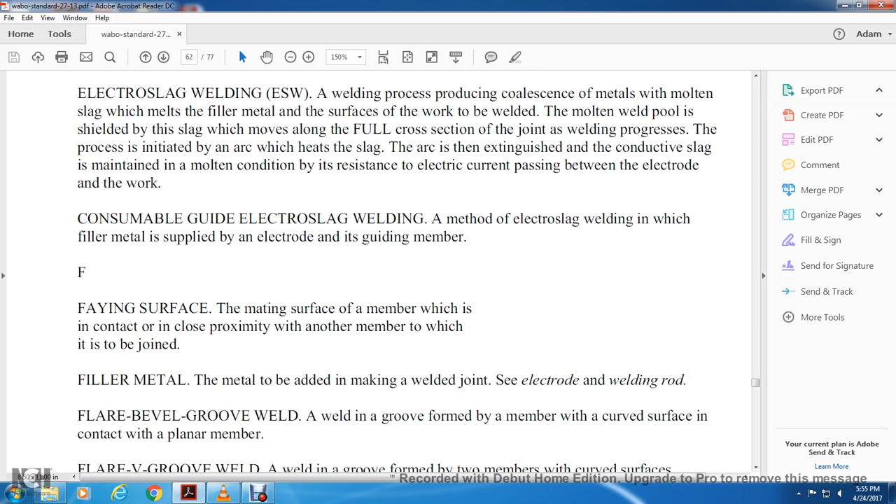Flare bevel groove weld: a weld in a groove formed by a member with a curved surface in contact with a planar member. Flare V groove weld: a weld in a groove formed by two members with curved surfaces. Flash: the material which is expelled or squeezed out of a welded joint and which forms around the weld. Flat position.

The welding position used to weld from the upper side of the joint, with the face of the weld approximately horizontal. Flux cored arc welding, FCAW: an arc welding process that produces coalescence of metals by heating them with an arc between a continuous filler metal consumable electrode and the work. Shielding is provided by a flux contained within the electrode. Additional shielding may or may not be obtained from an externally supplied gas or gas mixture.

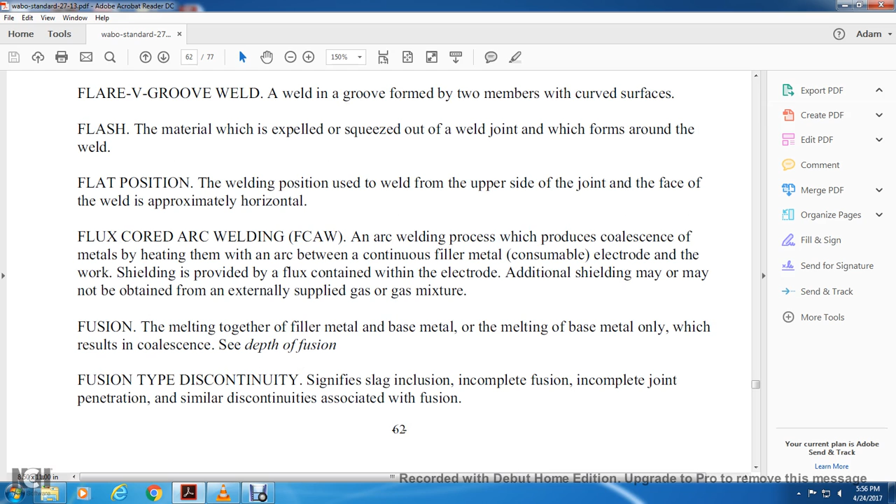Fusion: the melting together of filler metal and base metal, or the melting of the base metal only, which results in coalescence. Depth of fusion. Fusion-type discontinuity: signifies slag inclusion, incomplete fusion, incomplete joint penetration, and similar discontinuities associated with fusion. Fusion zone: the area of base metal melted as determined on the cross section of a weld.

Gas metal arc welding: an arc welding process which produces coalescence of metals by heating them with an arc between a continuous filler metal consumable electrode and the work. Shielding is obtained entirely from an externally supplied gas or gas mixture. Some methods of this process are called MIG or CO2 welding, non-preferred terms. Gas metal arc welding short circuit arc: a gas metal arc welding process variation in which the consumable electrode is deposited during repeated short circuits, sometimes referred to as MIG or CO2 welding, non-preferred terms.

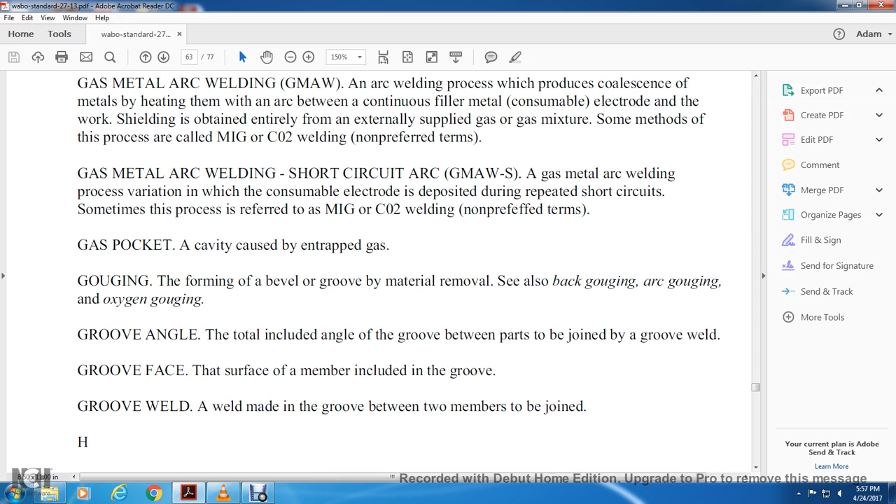Gas pocket: any cavity caused by entrapped gas. Gouging: the forming of a bevel or groove by material removal. See back gouging, arc gouging, oxygen gouging. Groove angle: the total included angle of the groove between parts to be joined by a groove weld. Groove face: the surface of a member included in the groove. Groove weld: a weld made in the groove between two members to be joined. Heat affected zone: the portion of the base metal which has not been melted, but whose mechanical properties or microstructure have been altered by the heat of welding, brazing, soldering, or cutting.

Horizontal fixed position, pipe welding: position of a pipe joint in which the axis of the pipe is approximately horizontal and the pipe is not rotated during welding. Horizontal position, fillet weld: position in which welding is performed on the upper side of an approximately horizontal surface and against an approximately vertical surface. Horizontal position, groove weld: position of welding in which the weld axis lies in an approximately horizontal plane and the face of the weld lies in an approximately vertical plane. Horizontal rolled position, pipe welding: position of a pipe joint in which the axis of the pipe is approximately horizontal and welding is performed in the flat position by rotating the pipe.

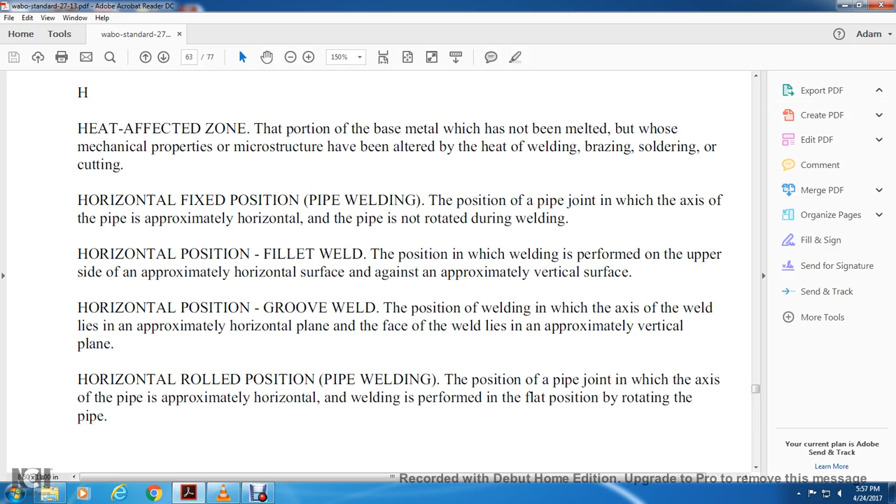Inert gas arc welding: see preferred term gas metal arc welding. Intermittent weld: a weld in which the continuity is broken by recurring unwelded spaces. Interpass temperature: in a multiple-pass weld, the minimum and maximum temperature of the deposited weld metal before the next pass is started. Joint: the junction of members or the edges of members that are to be joined or have been joined. Joint penetration: the minimum depth a groove or flange weld extends from its face into a joint, exclusive of reinforcement. Joint penetration may include root penetration.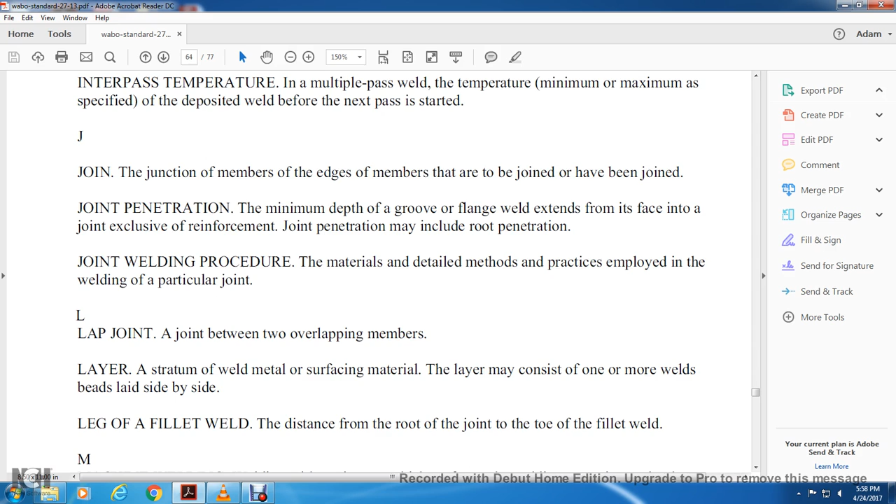Joint welding procedure: the materials, detailed methods and practices employed in the welding of a particular joint. Lap joint: a joint between two overlapping members. Layer: a stratum of weld metal or surfacing material, which may consist of one or more weld beads laid side by side. Leg of a fillet weld: the distance from the root of the joint to the toe of the fillet weld. Machine welding: welding with equipment which performs the welding operation under the constant observation and control of an operator. The equipment may or may not perform loading and unloading of the work. See automatic welding. Manual welding: a welding operation performed and controlled completely by hand. See automatic welding, machine welding, and semi-automatic welding.

Overhead position: the position in which welding is performed from the underside of the joint. Overlap: the protrusion of weld metal beyond the toe, face, or root of the weld. Oxygen cutting: a group of cutting processes used to sever or remove metals by means of the chemical reaction of oxygen with the base metal at elevated temperatures. In the case of oxidation-resistant metals, the reaction is facilitated by the use of a chemical flux or metal powder. Oxygen gouging: an application of oxygen cutting in which a bevel or groove is formed.

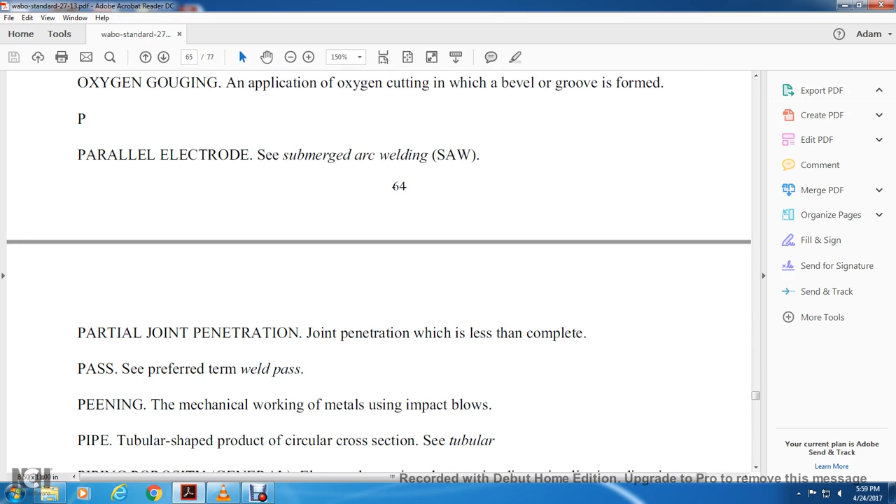Parallel electrode: see submerged arc welding. Partial joint penetration. Pass: see preferred term weld pass. Peening: the mechanical working of metals using impact blows. Pipe: tubular shape of circular cross section. See tubular. Porosity.

Generally elongated porosity, where the major dimension lies in a direction approximately normal to the weld surface, is frequently referred to as pinholes when the porosity extends to the weld surface. Plug weld: a circular weld made through a hole in one member of a lap or T-joint, fusing that member to the other. The walls of the hole may or may not be parallel, and the hole may be partially or completely filled with weld metal. A fillet weld in a hole, or a spot weld, should not be construed as conforming to this definition.

Porosity: cavity-type discontinuities formed by gas entrapment during solidification. Positioned weld: a weld made in a joint that has been placed so as to facilitate making the weld. Postheating, post-weld heat treatment: any heat treatment subsequent to welding. Preheating: the application of heat to the base metal immediately before welding, brazing, soldering, or cutting.

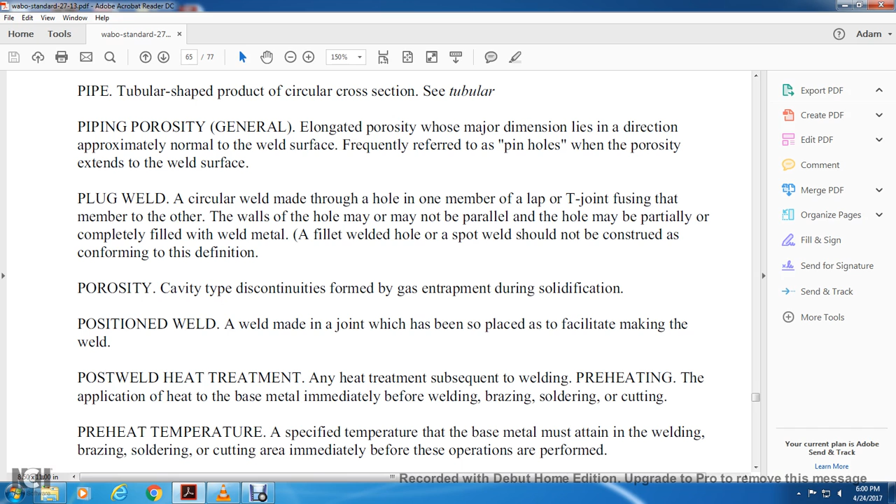Preheat temperature: the specified temperature the base metal must attain in the welding, brazing, soldering, or cutting area immediately before these operations are performed. Procedure qualification: the demonstration that welds made by a specific procedure can meet prescribed standards; see the preferred terms welder performance qualification and procedure qualification. Random sequence: see the preferred term wandering sequence. Reinforcement of weld: weld metal in excess of the quantity required to fill a joint.

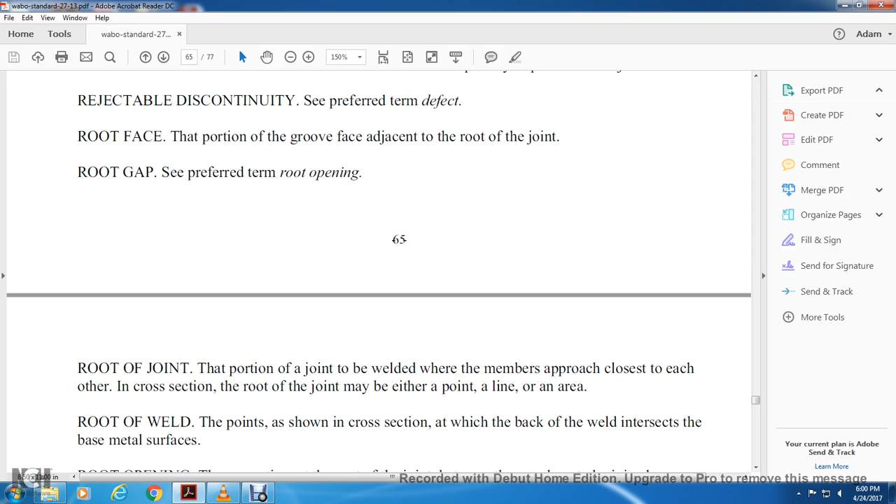Rejectable discontinuity: referred to as a defect. Root face: the portion of the groove face adjacent to the root of the joint. Root gap: see the preferred term root opening. Root of the joint: the portion of the joint where the members approach closest to each other in cross section. The root of the joint may be either a point, a line, or an area. Root of the weld: the points, shown in cross section, at which the back of the weld intersects the base metal surfaces. Root opening: the separation at the root of the joint between the members to be joined.

Semi-automatic arc welding: arc welding with equipment which controls only the filler metal feed. The advance of the welding is manually controlled. Shielded metal arc welding, SMAW: an arc welding process that produces coalescence of metals by heating with an arc between a covered metal electrode and the work. Shielding is obtained from decomposition of the electrode covering. Pressure is not used. The filler metal is obtained from the electrode.

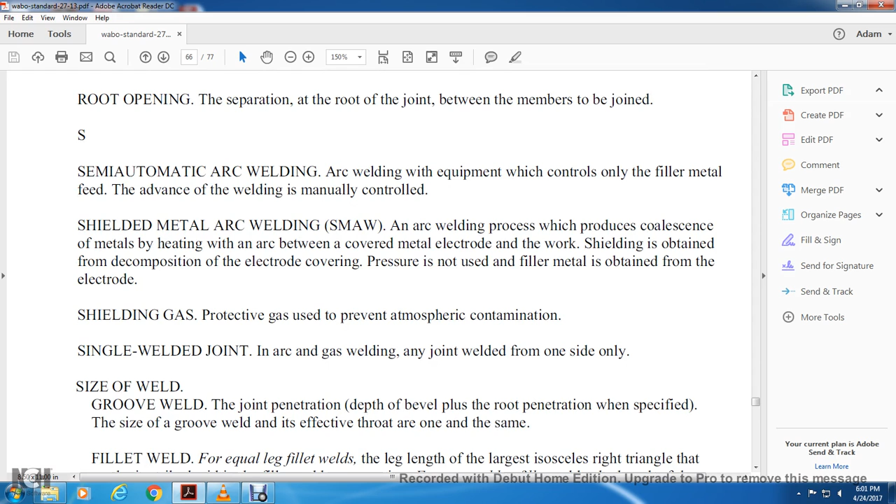Shielding gas: protective gas used to prevent atmospheric contamination. Single-welded joint: in arc and gas welding, any joint welded from one side only. Size of weld: for a groove weld, the joint penetration, depth of bevel plus the root penetration when specified; the size of a groove weld and its effective throat are one and the same. For equal leg fillet welds, the leg length of the largest isosceles right triangle that can be inscribed within the fillet weld cross section.

For unequal leg fillet welds, the leg lengths of the largest right triangle that can be inscribed within the fillet weld cross section. Note: when one member makes an angle with the other member greater than 105 degrees, the leg length is of less significance than the effective throat, which is the controlling factor in the strength of the weld.

Slot weld: a weld made in an elongated hole in one member of a lap or T-joint, joining that member to the portion of the surface of the other member exposed through the hole. The hole may be open at one end and may be partially or completely filled with weld metal. A fillet-welded slot should not be construed as conforming to this definition. Spatter: the metal particles expelled during welding which do not form part of the weld. Stringer bead: a type of weld bead made without appreciable weaving motion.

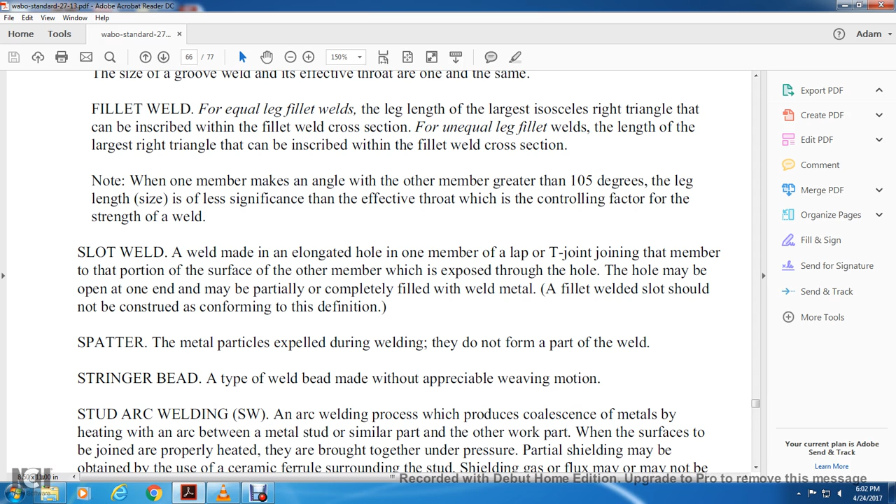Stud arc welding, SW: an arc welding process that produces coalescence of metals by heating with an arc between a metal stud, or similar part, and the other work. When the surfaces to be joined are properly heated, they are brought together under pressure. Partial shielding may be obtained by the use of a ceramic ferrule surrounding the stud. Shielding gas or flux may or may not be used.

Submerged arc welding, SAW, the arc welding process that produces coalescence of metals by heating with an arc between the bare metal electrodes and the work. The arc is shielded by a blanket of granular fusible material on the work. Pressure is not used. The filler metal is obtained from the electrode and sometimes from a supplementary welding rod.

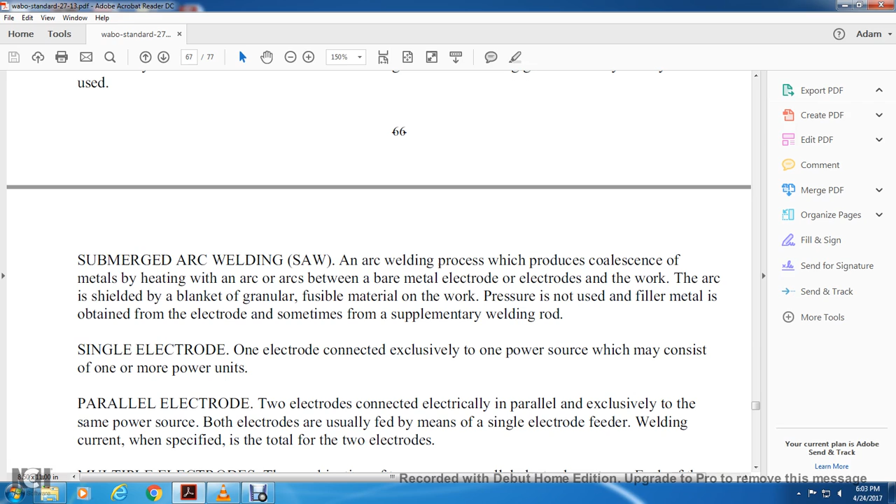Single electrode, one electrode connected exclusively to one power source, which may consist of one or more power units. Parallel electrode, two electrodes connected electrically in parallel and exclusively to the same power source. Both electrodes are usually fed by means of a single electrode feeder. Welding current, when specified, is the total for the two electrodes. Multiple electrodes, the combination of two or more parallel electrode systems. Each of the component systems has its own independent power source and its own electrode feeder.

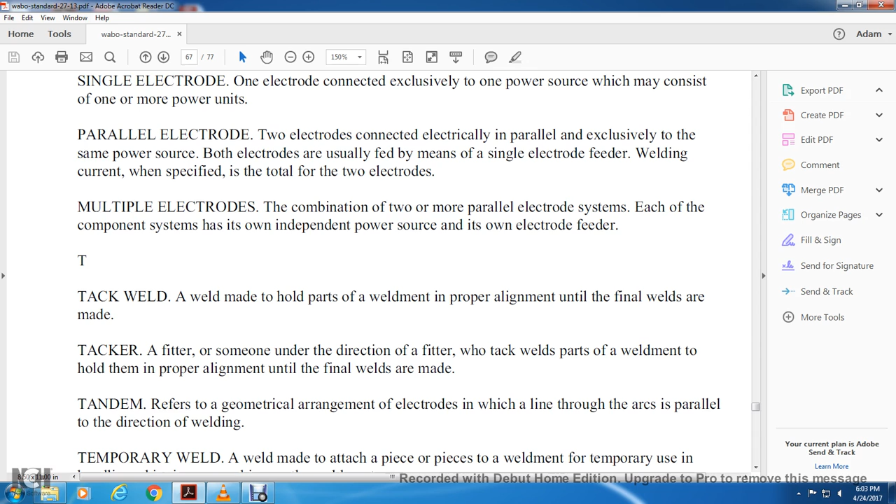Tack weld, a weld made to hold parts of a weldment in proper alignment until the final welds are made. Tacker, a fitter, or someone under the direction of a fitter, who tack welds parts of a weldment to hold them in proper alignment until the final welds are made. Tandem refers to a geometrical arrangement of electrodes in which a line through the arcs is parallel to the direction of welding. Temporary weld, a weld made to attach a piece or pieces to a weldment for temporary use in handling, shipping, or working on the weldment.

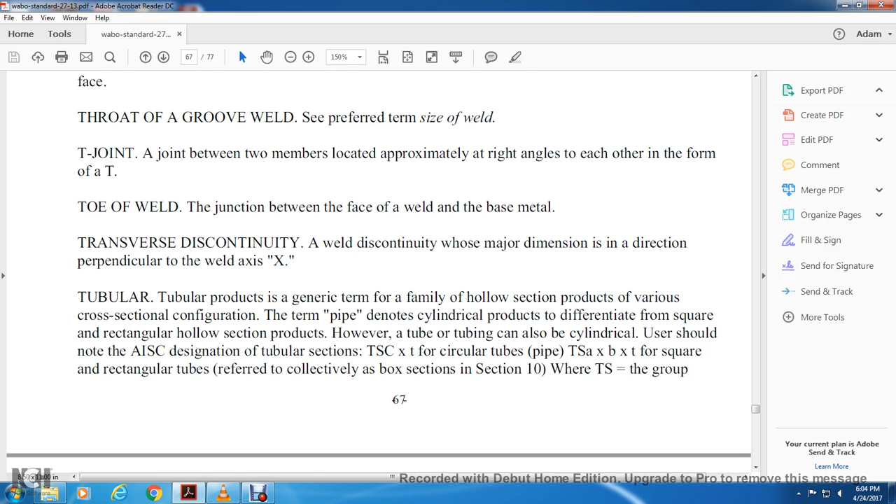Tubular products is a generic term for a family of hollow section products of various cross-sectional configurations. The term pipe denotes cylindrical products to differentiate them from square and rectangular hollow section products. However, a tube or tubing can be cylindrical. Users should note the AISC designation for tubular sections: TS D times T for circular tubes or pipes, and TS A times B times T for square and rectangular tubes, referred to collectively as box sections, whereas TS is for the group. Symbols: T is nominal wall thickness, D is nominal outside diameter, A is nominal major width, and B is nominal minor width.

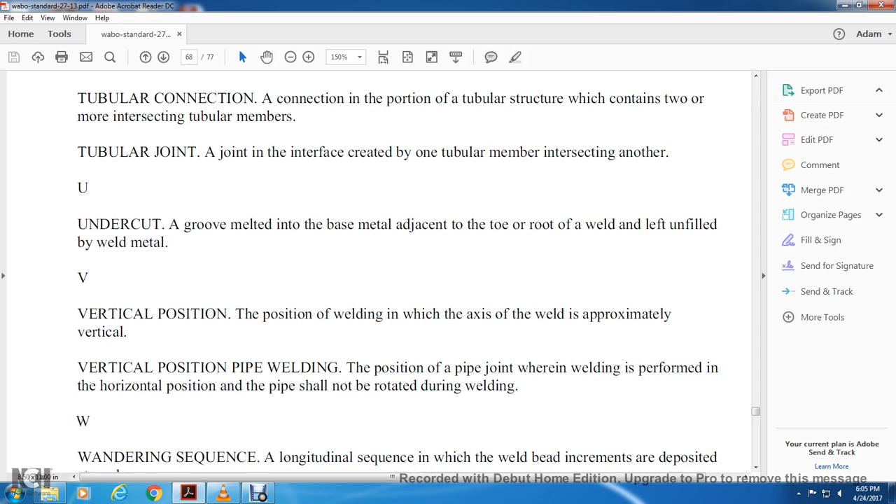Tubular connection, a connection in the portion of a tubular structure which contains two or more intersecting tubular members. Tubular joint, the interface created by one tubular member intersecting another. U: undercut, a groove melted into the base metal adjacent to the toe or root of the weld and left unfilled by weld metal. Vertical position, the position of welding in which the axis of the weld is approximately vertical. Vertical position in pipe welding, the position of the pipe in which welding is performed in the horizontal position and the pipe is not rotated during welding.

Wandering sequence, a longitudinal sequence in which the weld bead increments are deposited at random. Weave bead, a type of weld bead made with transverse oscillation. Welding, a localized coalescence of metals produced either by heating to suitable temperatures, with or without the application of pressure, or by pressure alone, with or without the use of filler metal. Weldability, the capacity of a metal to be welded under the fabrication conditions imposed into a specific, suitably designed structure and to perform satisfactorily in the intended service. Weld bead, a weld deposit resulting from a pass; see stringer bead, weave bead.

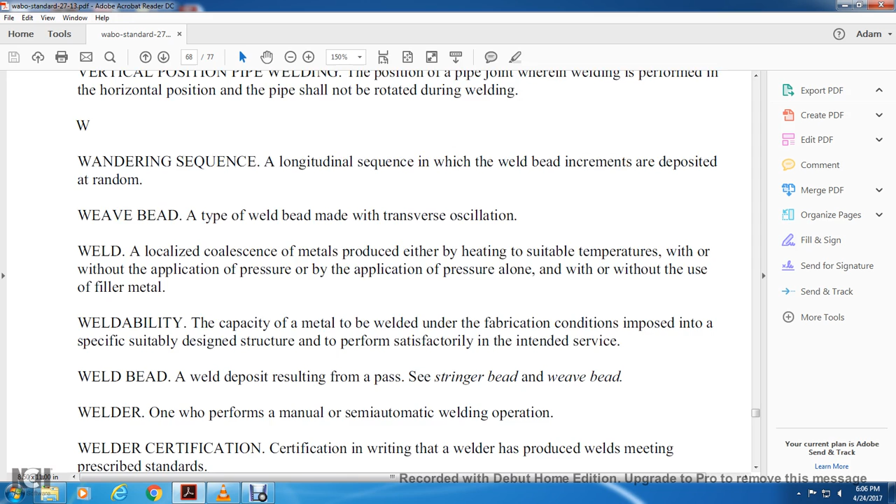Welder, one who performs manual or semi-automatic welding operations. Welder certification, written certification that the welder has produced welds meeting prescribed standards. Welder performance qualification, demonstrating the welder's ability to produce welds meeting prescribed standards. Welding process, a joining process used for making welds. Welding machine, equipment used to perform the welding operation. For example, spot welding machine, arc welding machine, seam welding machine, etc. Welding operator, one who operates machine or automatic welding equipment.

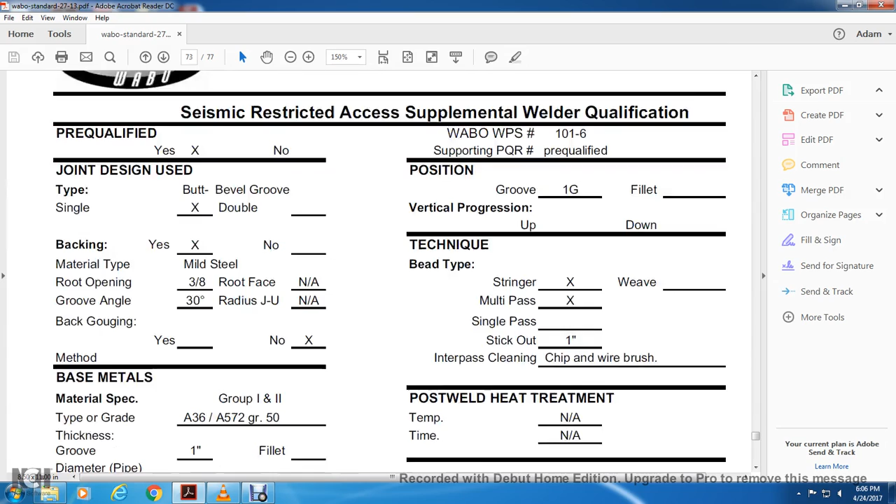Welding procedure, the detailed methods and practices, including all joint welding procedures, involved in the production of a weldment. Joint welding procedure, joint welding sequence, the order of making the welds in a weldment. Weldment, an assembly whose component parts are joined by welding. And then we have your sample welding procedure specification sheet, and the rest of your welding procedure specification sheets. These are the sheets for your qualification in the current WABO.